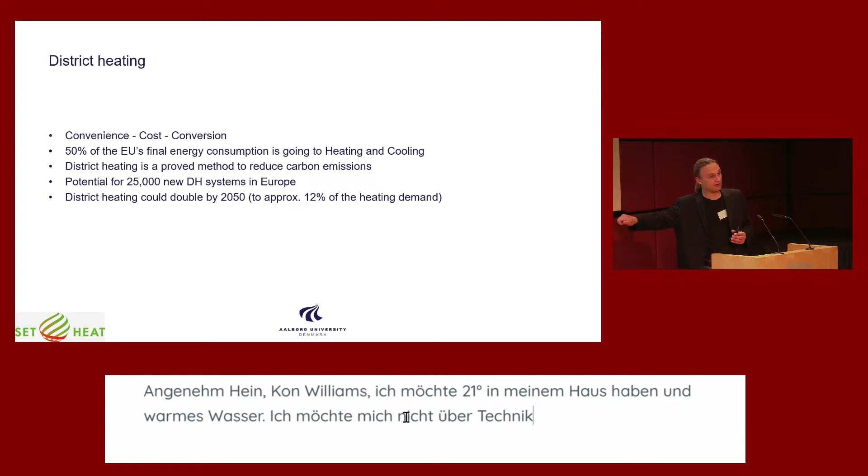Convenience, that means that I want to have 21 degrees in my house, and that's it. I want hot water when I turn on the water, that's it. I do not need to have a boiler I can fiddle with. I do not need to care about any technicalities. I need a Danfoss radiator valve thermostat that I can turn, and then my room gets warm. That's what I need. So convenience, that's a very big issue in Denmark, that you don't deal with anything. You don't have any costs. I've lived in my house for 20 years, and I've never paid for any maintenance of my district heating installation.

Cost, for 95% of Danish residents, the district heating cost they have is lower than the alternative of a natural gas boiler. So we have a very small proportion who would have been better off if they had a natural gas boiler. If we compare to electric heating or individual heat pumps, it's even smaller shares. It's something like 99.7% of district heating consumers. They are better off with district heating than if they had had an electric boiler in the system. The reason it is not 100% is simply that we have also expanded to some places where people have made miscalculations. Heat density too low, gas prices too high, or electricity prices too low, or whatever they have designed the systems according to.

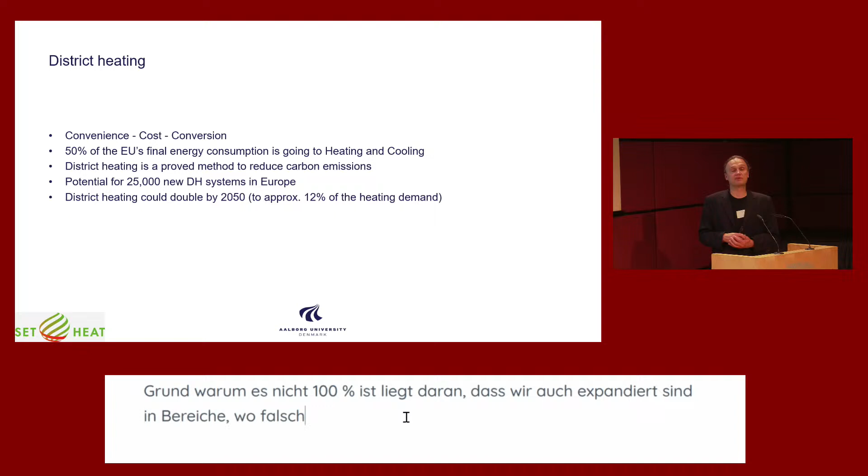But for the vast majority of Danes, district heating is the cheaper option, and everybody wants to get it if they have the opportunity of getting it, basically. Lastly, my last C, that's the conversion. When we are converting the energy system, we're transitioning to carbon-free technologies.

If you have a city of, let's say, 100,000 dwellings, well, if you have to address them individually because they each have their individual solutions, you will never transition that city. But if it's a district heating company who can basically make the change in-house, then it's a completely different situation. So basically, I'm living in Aalborg, and I don't care about how I transition my house because the district heating company does it for me. And it's the same throughout the country.

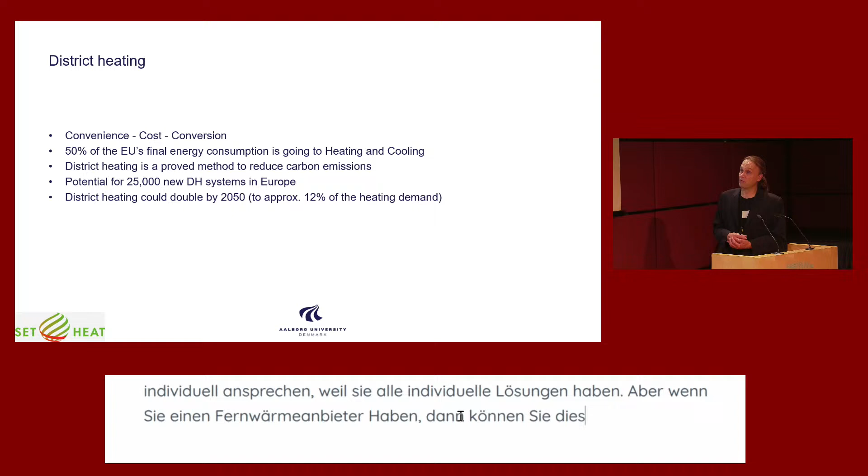A few numbers. We already heard that we could take all the waste heat that we have in Europe, surplus, excess. We have 3 different words, but if I use them, it will mean the same. We can take the excess heat that we have in Europe and basically heat all the houses in Europe. Another number is that 43% of the energy that goes into industry or into power plants is waste heat. So whenever you're putting 100 units of energy into some activity, then a lot of it goes into the nearest stream, the sea, into the air, or wherever you will blow off your heat to. So 43% could actually be used for something else.

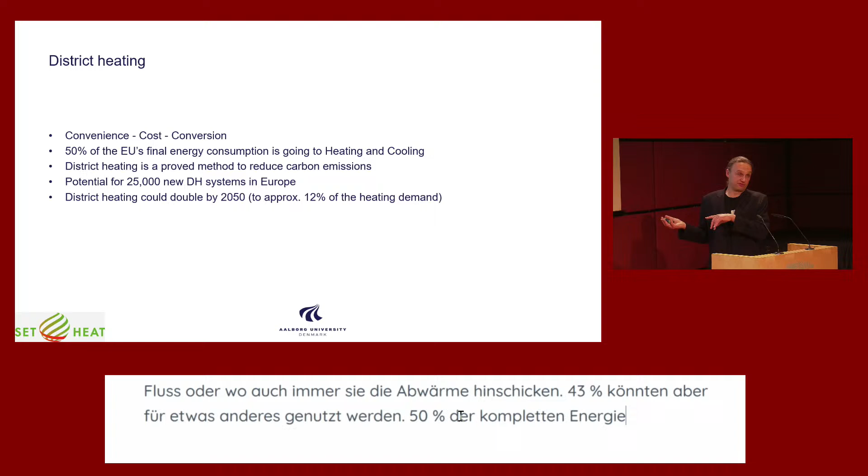Secondly, 50% of the overall EU energy consumption, that goes to heating and cooling. So we have a very large potential for doing something. That's the positive way of saying it. Of course, the negative way of saying it is that we have a big issue there. But fortunately, we also have some very nice solutions. So district heating, that is definitely a proven methodology for tackling this issue.

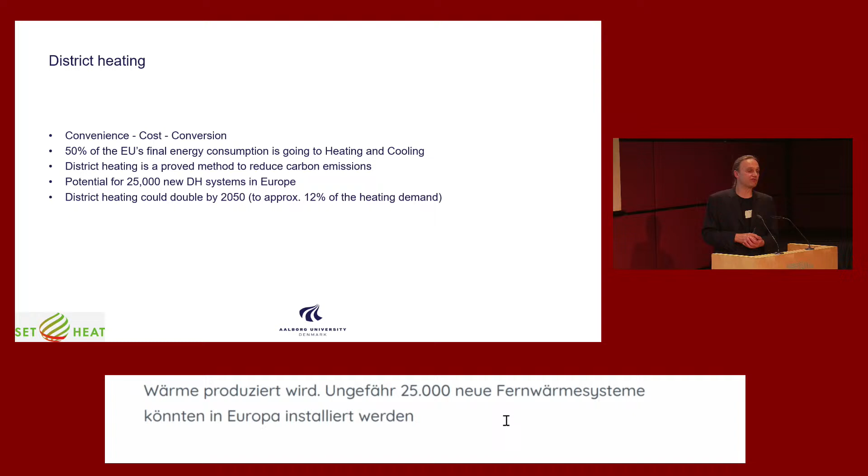We have made various studies on a European scale and tried to see where do we have a nice concentration of heating demands, and that is the prerequisite basically for district heating. But something like 25,000, give or take, new district heating systems could actually be installed throughout Europe, and we could double it. These numbers are a bit old, so maybe I think we have a bit more than 6% of district heating now, but we could roughly, with a certain economic sense, also double the district heating demand. And of course, if we go for the full exploitation of the waste heat demand, then we could go even higher than that.

So I have made 3 steps basically in my utilization of waste heat. The first one, that is basically what we call cogeneration of heat and power, where you actually take the heat from power production. And in Denmark, we don't actually consider this waste heat or surplus heat because it's so ingrained in our system that this is not waste. But go outside Denmark, then it is waste heat. Go to France, nuclear reactors. There's no exploitation of the waste heat from nuclear reactors, for instance. So cogeneration of heat and power.

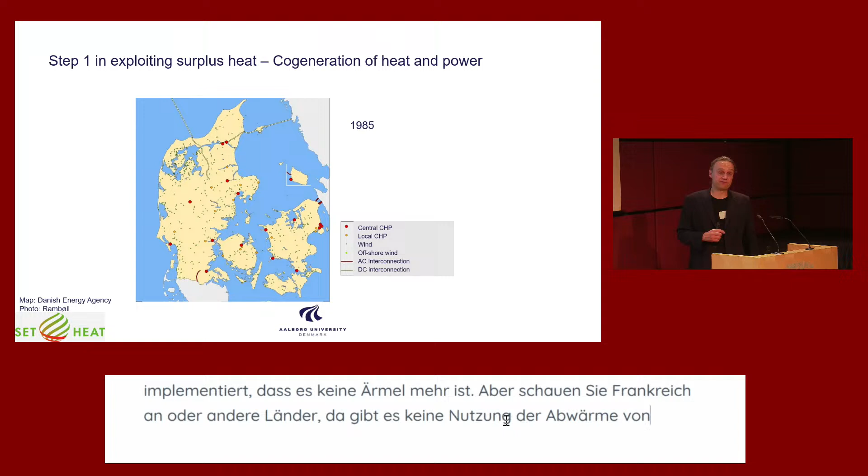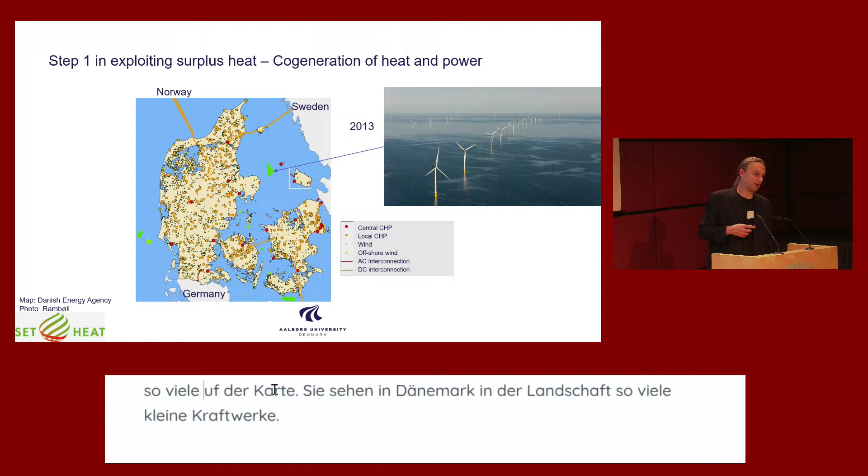In Denmark, 1985, we had a few big power stations where you actually utilized the heat. And then we started heat planning, and then we moved electricity production out into the countryside, out into the small towns and villages and cities of all sizes, and basically located electricity production where you have a heating demand. And that's why you suddenly have all these new orange dots throughout the Danish landscapes. And then when you're driving in Denmark, you will see all these power stations located in the landscape because they all have a thermal storage, so you can easily recognize them. So that's one thing. Now, of course, we're moving offshore, and that means that all our power stations are going toward heat pumps or waste heat or whatever we can put into the grid.

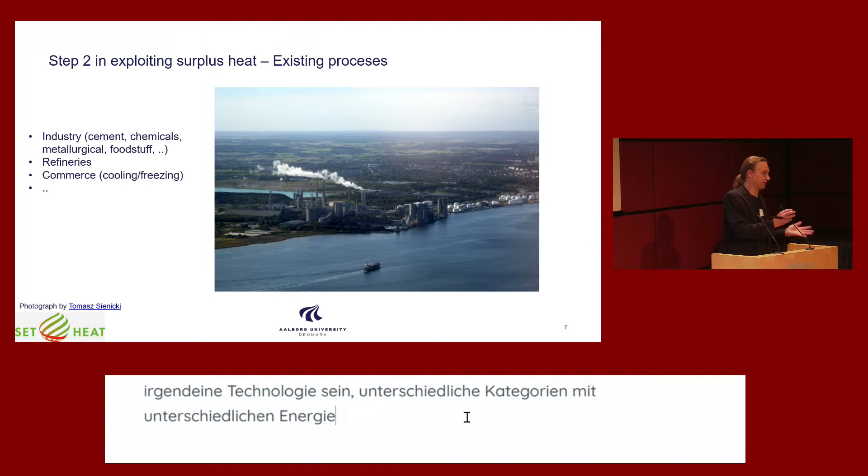Secondly, that is exploiting existing surplus that we have in the system. This is a cement factory, but it could also be chemicals. I know that's a sulfuric acid factory in Hamburg, which is supplying a lot of district heating. Metals, any technology basically. In different categories, you will have different shares of the energy which could actually be used. In food stuff, it's like 10% of the energy that goes into it you could actually extract. In metals, I think it's about 25% of the energy that you put into them that you can actually extract as waste heat.

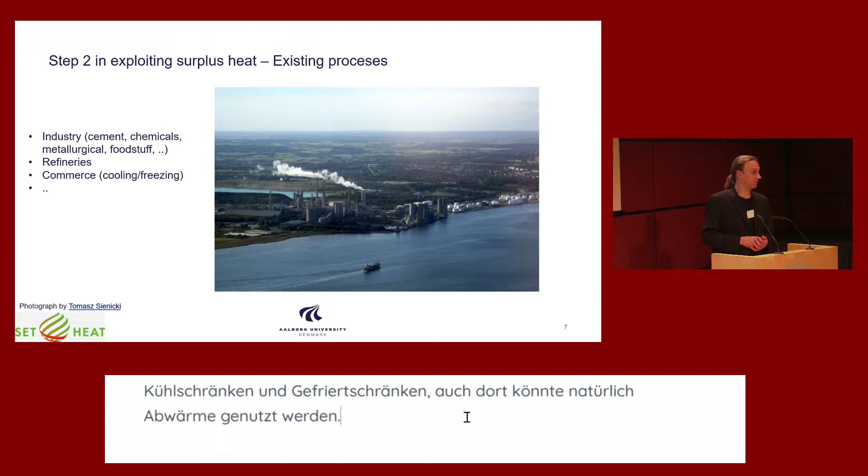Refineries, commerce. That's maybe one of the newer ones because that's a little bit more scattered. You don't have the very large ones, but I mean, when you have a small supermarket, just the cooling and freezing facilities they have, they can actually be picked up and put into a district heating grid and thereby supply heating to residents in the area. So it's just a matter of imagination that you simply have to look where do we have heating demands, or surplus heat, and basically whenever you have an energy demand, then you will typically also have a waste heat resource.

Step 3, and this is where we are moving now and where we're also moving in Denmark. First of all, we have a game changer in Power-to-X because that is really going to generate vast amounts of surplus heat. I think it will double the amount of waste heat that we basically have when we start looking into Power-to-X, because of the conversion efficiencies of Power-to-X facilities, but also something like data centers. In Denmark, we're expecting them to ten-double in about 10 years, going up to 40% of the electricity demand in about 2035, I believe.

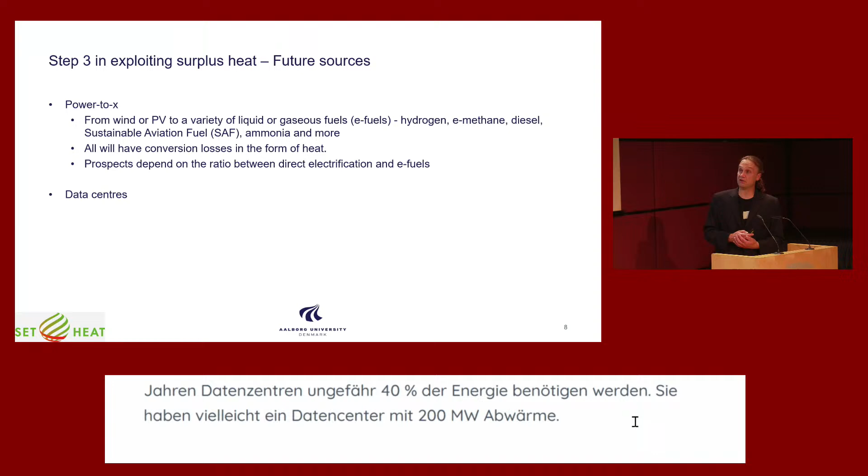And basically in a data center, you might have a data center using 200 megawatts of electricity, and that more or less translates into 200 megawatts, you can deduct a bit, of waste heat. So you have an enormous amount of waste heat from data centers. So that's also definitely going to be a game changer. So that was my 3 steps of utilization of waste heat.

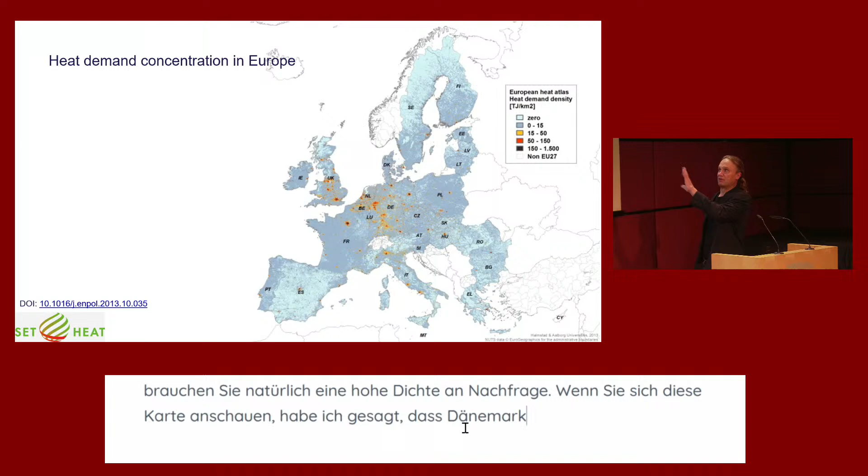Let's look at heat demand concentrations in Europe, because when you want to have district heating, then basically you need to have a high density of heating demand. And strangely enough, if you look at this map, I said that Denmark is the place in the world with the highest proportion of district heating. It's only Copenhagen that actually has any kind of coloring on this map, despite what I said. So not having colors does not mean you don't have a potential. And you could also say that places with color definitely have a potential. So we have a lot of potentials throughout Europe.

So whenever you have a color on this map, that means you have a very high heating density. So Paris has a very large heating demand, but of course there's no district heating in Paris. You don't typically utilize waste heat from nuclear, as I mentioned. That's one of the reasons why you don't see anything in France, for instance.

So for those of you who are not into thermodynamics, whenever you're producing electricity, you waste a heck of a lot of energy in the form of heat. The same in your car, basically.

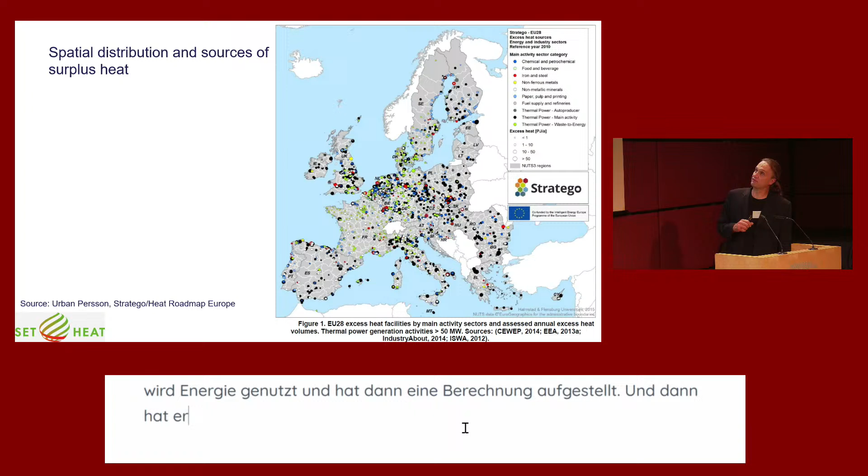So this is my colleague Urban Persson, who made this also in Heat Roadmap Europe. He went into the EU register of all CO2 emitters, and he pinpointed them on a map. He found out what they're using the energy for, and he made this calculation of basically if it's foodstuff, then it's like 10%. If it's metallurgical industry, then it's more like 25%. And then he found all the different point sources that we have of waste heat in Europe. So these are all the different sources that we have in Europe. Different colors are indicating different types.

And you'll see also in Germany, of course, we have plenty of large point sources of waste heat that we can use. And again, Denmark actually also shows a nice selection of sources, but it does not even capture what we have in Denmark. So if we expand that to other countries, it will not necessarily capture it, especially not if you are taking the electricity production and moving it to places without current electricity production, but where you have a heating demand. Then you can go beyond this map here also.

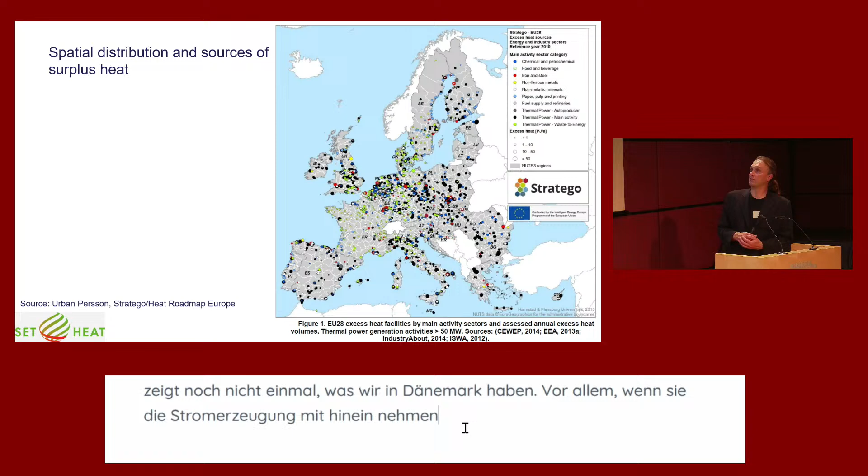We made some scenarios of how we can basically design a European energy system. And just one comment about this: 70% of the heating we found here, or Urban found, is from power generation, 25% is from industry, and 5% is from waste-to-energy plants.

But as was also mentioned before, when we are looking into this, there's a local aspect. So basically, where do you have it? And do you have it near a heating demand? So that's one, you have a spatial aspect. You also have a temporal aspect: does it occur at the right time or not? And thirdly, you will also have technical issues.

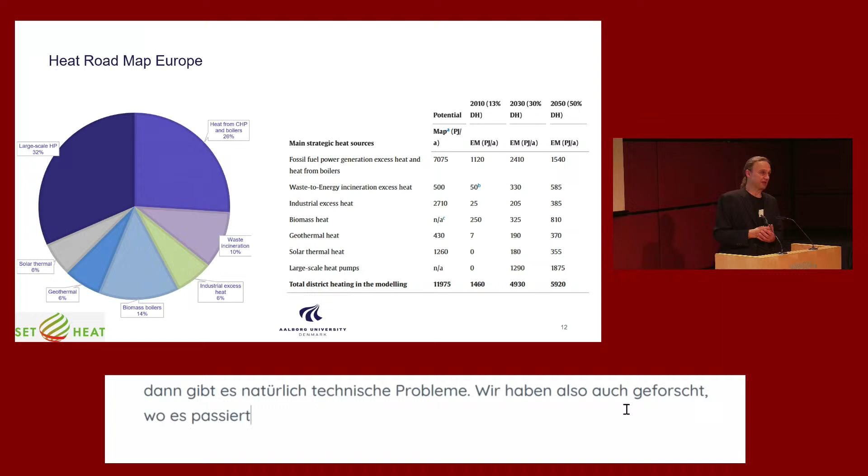So when we're making these analyses, we're also investigating where it happens, what the profile is over the year and over the day and so on. Does it actually fit into the energy system? So here, of course, waste incineration is typically placed in the vicinity of big cities and industry. Sometimes you actually put them far out in the countryside where you can't actually use the energy.

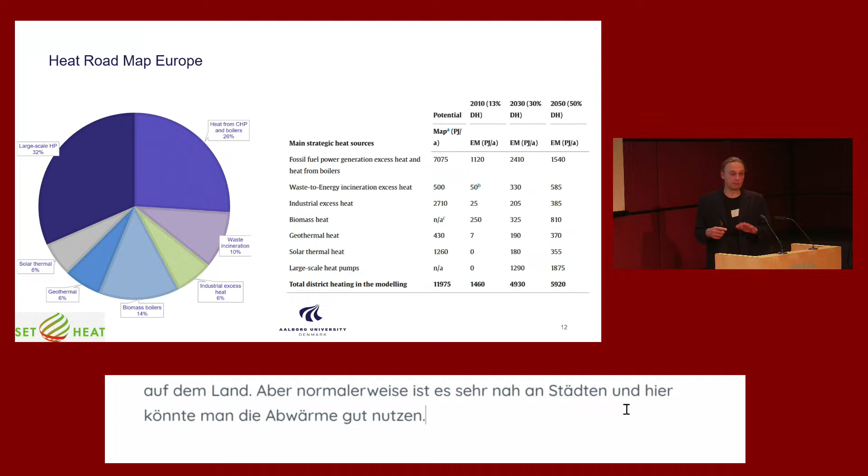Industrial excess heat you also have here. So even though this is 5 times higher than waste incineration in actual numbers, since waste incineration is more controllable, we can use that a little bit more.

Heat pumps, that is definitely something that we're also looking into in the future. And we will also combine them with waste resources, because whenever you have a waste resource, maybe it's at 20 degrees, maybe it's at 30 degrees, which is not sufficient for heating a house. But combined with a heat pump, it provides a very good opportunity for providing low-cost heating.

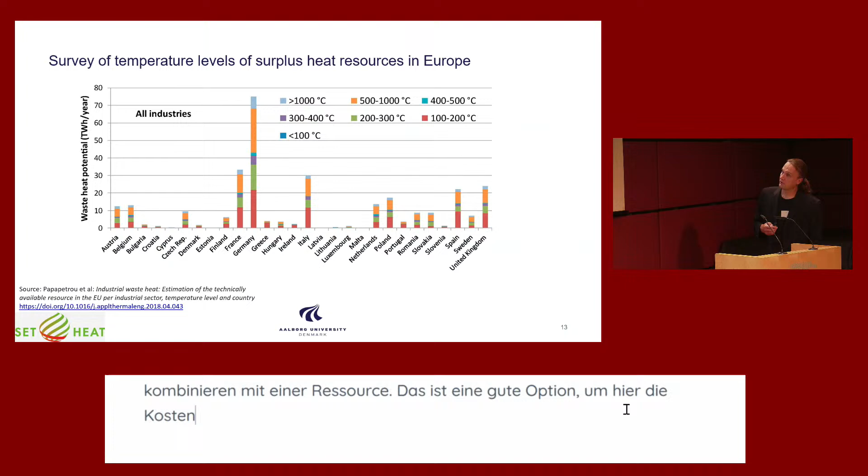I'm skipping this because I'm a bit short on time and it's not so interesting.

But about the temperature levels, because what we are also doing is moving towards lower temperature levels. The lower the temperature levels you have in the district heating system, the more opportunities you have. For instance, if you take the heat from cooling in supermarkets, that will come at modest temperatures, whereas if you have something combusting, then you'll have it at higher temperatures. So you can't use the lower temperatures directly.

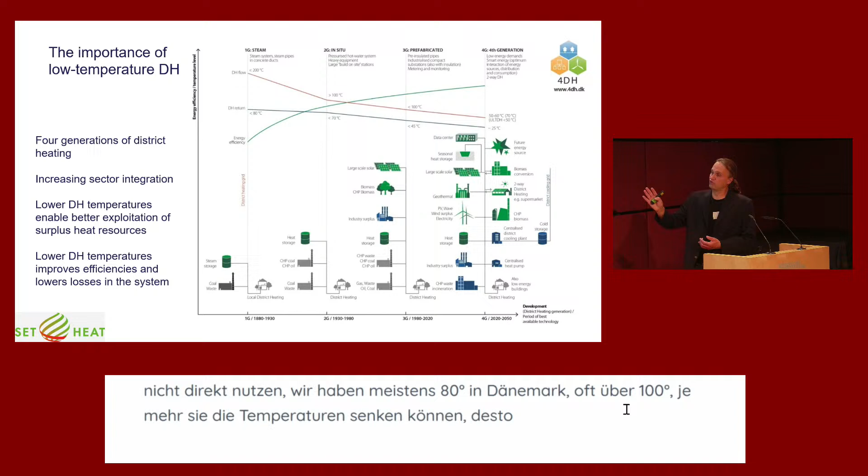Typically in Denmark you will have about 80 degrees, and I know that in many other places you'll have temperatures above 100 degrees. But the more you can push the temperatures down, the further you can actually use your energy or your waste heat.

And moving towards the more complex fourth generation district heating system, you're going down to temperatures of maybe 60 degrees, and that means you have more options for using energy directly and not through a heat pump. Heat pumps are nice if you have something at 20, 30 degrees, but if you have something at 60 degrees, then it's basically nicer if you can simply accustom the consumers to use lower temperatures.

This is just a scenario that we made for Aalborg, where we have the surplus heat. Of course, we have some good facilities in Aalborg for providing surplus heat. So this is about 50% of the entire heating demand in Aalborg that we can easily supply with surplus heat.

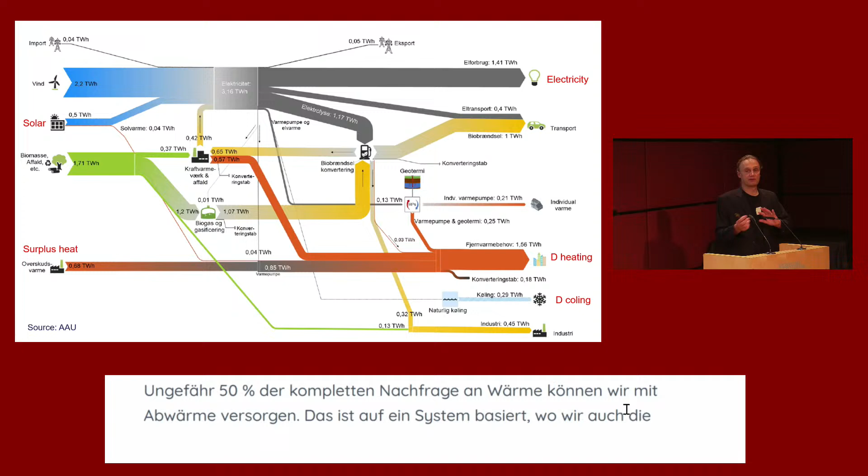And it should be mentioned that this is based on a system where we have also looked into the temporal characteristics of power production, PV, wind turbines, and everything, to basically create a system which is in balance. So it's not just a matter of having surplus heat and production at certain times. They have to be at the right time, and you have to provide the flexibility measures to also use them in the system.

Looking at how it's gone over the years, the top curve here shows the production from the big central power stations. So that is surplus heat, in the Danish context at least. That is still a very large one. Then we also have surplus heat from smaller CHP systems based on gas engines and gas turbines. But they have actually been decreasing over the last few years, because electricity prices are so low that there are no economic incentives for using them.

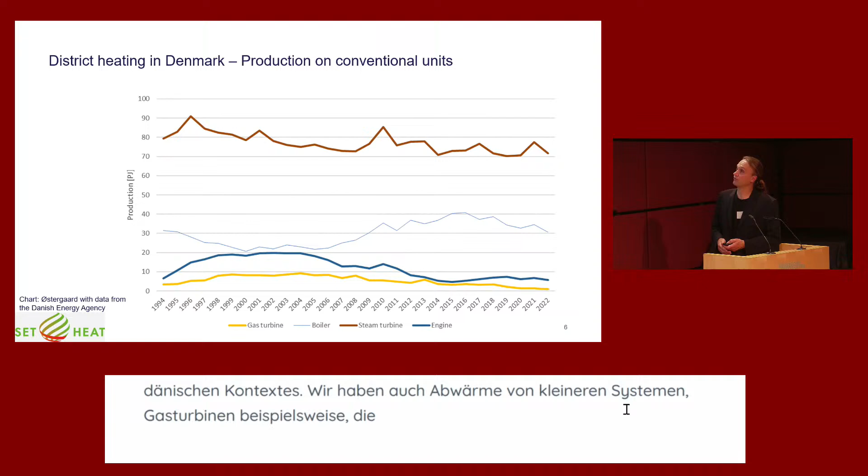What has happened instead is that things like electric boilers, solar heating and heat pumps are very much on the increase. And also waste heat. This is industrial waste heat, as opposed to the one I showed before, which was waste heat from power generation. Industrial waste heat has been constant over a number of years, but now it's increasing because we are trying to focus even more on where the options are for surplus heat.

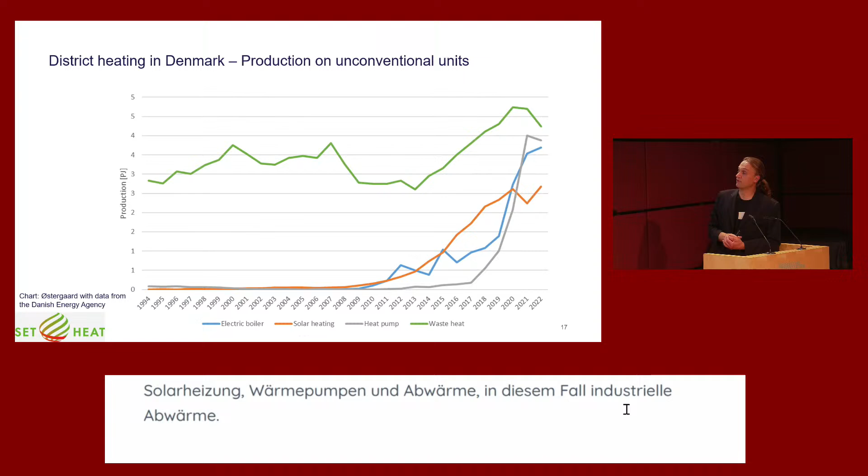And those were my words on the bigger picture of district heating and waste heat resources in district heating.

Thank you very much. We do have time for one question of clarification. If anyone has one question that is really just about any of the points that Paul made, not debate yet. If you don't have any questions, we can also just move on. But I'd have one question.

If you add up the graphs that we saw now, what is the percentage of unconventional heat versus the old system? It's still small. But if you compare waste heat, for instance, with the gas turbines and the gas engines from the smaller CHP, then it's actually bigger because they're basically being phased out by the logics of the electricity market and the other ones are coming in. So even gas turbines in big cities, in the Danish context, big cities like Viborg, they are being overtaken by waste heat resources because they are not economically attractive.

Great. We'll be happy to hear later on in the session what that looks like in practice. And now it's back to Kerstin Deller as part of our double feature, and you will give us an insight into what the German government has up its sleeve to make this transition happen in Germany as well. Thank you. Yes, maybe we can switch to the other slides. No? Okay. Yeah, perfect.

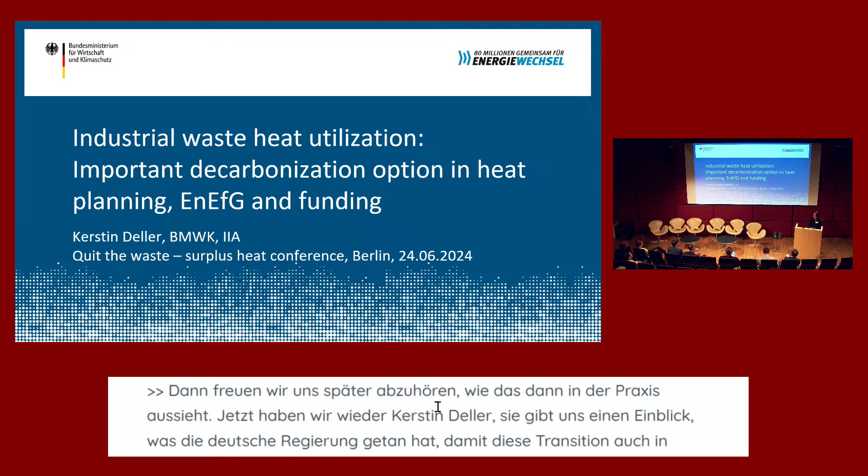Actually, as you have presented, we also see industrial waste heat utilization as an important decarbonization option in heat planning, in our Energy Efficiency Act and in funding. And I will focus on what has happened since last year when we were talking about these issues. I will present what we did in regulatory law concerning the Heat Planning Act and also the Energy Efficiency Act to promote the use of surplus heat, and also how our funding schemes are set up to promote this.

When you showed your slides on the whole of Europe, we saw that Germany is complicated. It's not like there's one area where there's a lot of district heating. You can look to the east, there are many district heating systems. You have other parts in big cities in the west, but you have areas where there's primarily decentralized heating. So a general approach in Germany is difficult, which is why we are making heat planning mandatory for the states, the Länder, but primarily for the municipalities.

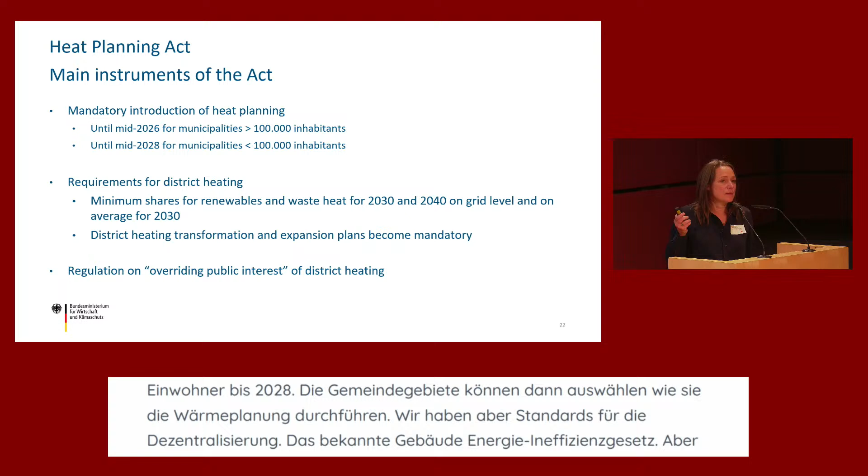We do have standards for decentralized heating, how much renewable energy has to be used, the famous Gebäudeenergiegesetz. But in our Heat Planning Act, we also have requirements for district heating, minimum shares for renewables and waste heat for 2030 and 2040 on a grid level and also on average for the whole country. These district heating transformation and expansion plans also become mandatory from then on.

How are the municipalities supposed to do heat planning? First of all, as you did for the whole of Europe, an analysis of the current status of municipal heat supply. Then a potential analysis of what renewable energy and waste heat in the planning area is there. And then the third step is a target scenario, including zoning of heat supply areas, which means it's either decentralized or district heating, and also showing a path towards how the targets are supposed to be reached.

From this, municipalities are supposed to make action plans, meaning a roadmap with specific actions, how to achieve the goals of minimum renewable energy and waste heat. More specifically, for the federal average, all district heating systems are supposed to reach at least 50% either of renewable energy or waste heat by 2030. And for each specific district heating system, it's supposed to be 30% by 2030 and 80% by 2040, every time either from renewable energies or waste heat. That is for existing district heating systems, so for transformation.

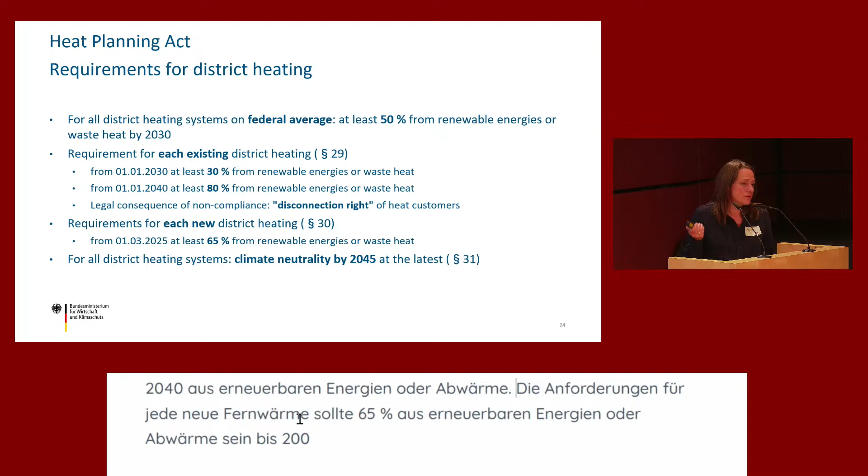Waste heat, as I already said, is equated with heat from renewable energies, which is a strong incentive to district heating operators to get in touch with potential waste heat suppliers. I'm not talking about cogeneration, but industrial surplus heat, and to integrate waste heat in district heating. For the potential analysis, how much waste heat or surplus heat is there, we have some regulations in the Energy Efficiency Act, which help to identify and leverage the potentials for surplus heat, especially for district heating. That's the second point I wanted to talk about. What is there on surplus heat in the Energy Efficiency Act?

Actually, this is the first legal framework to improve energy efficiency in Germany. It's in place since November 23. And it does have binding targets for both primary and final energy reduction in alignment with the European Energy Efficiency Directive.

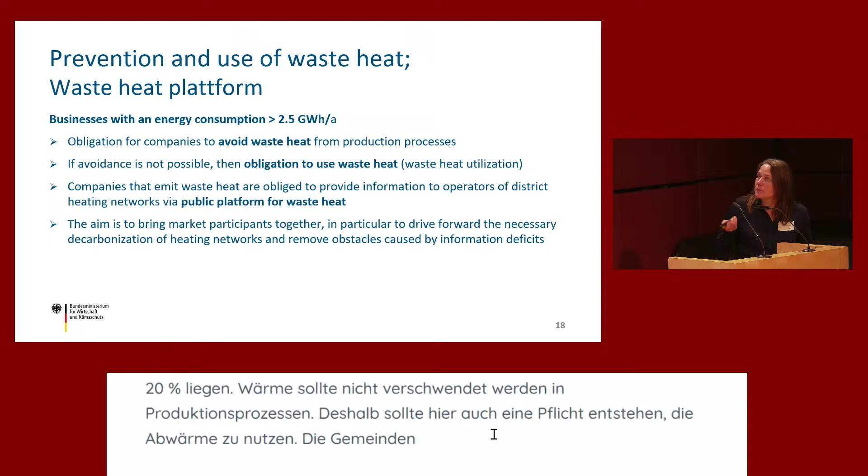So that the municipalities do know what surplus heat will be there, the companies are obliged to provide information to operators of district heating networks via public platforms for waste heat. And the aim is to bring market participants together, in particular to drive forward the necessary decarbonization of heat networks and remove obstacles caused by information deficits.

We also will have Frau Fröhlich presenting this afternoon something which is called AVANET, which additionally to the platform I presented now, has the objective to bring together on the one side companies, and on the other side district heating operators to bring projects forward, and also to learn from projects which have already been put into place.

As for the funding side, we do have on the one side the possibility to support projects from industry which want to, on the one side, reduce energy use, and on the other side, measures to extract waste heat and to connect this to district heating systems. The funding amount is maximum 20 million euros per project.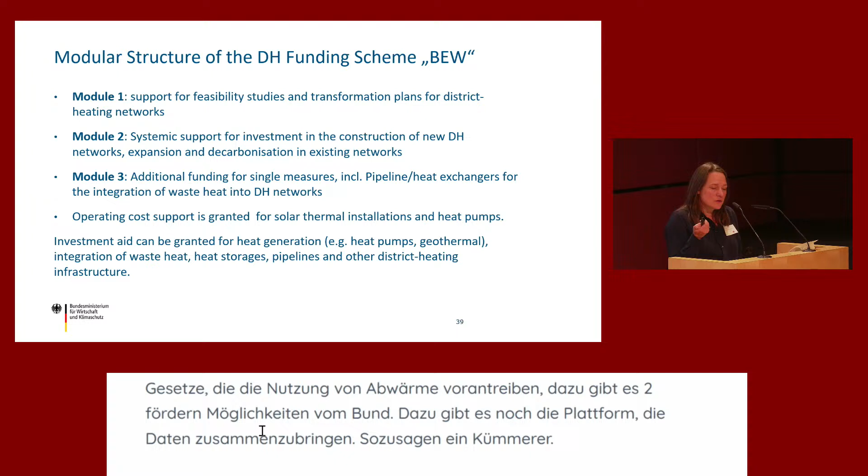So what happened since last year, to sum up, is we do have two legal acts in place which are supposed to incentivize the use of waste heat in district heating networks. We also have two funding schemes in place. And we do have a platform to bring data together, and also we fund a kind of Kümmerer, I don't know what that is in English, a project which really tries to stimulate communication and the dialogue between the relevant actors. Thank you.

Thank you, Kerstin Della, also for making up time. Excellent. I see already there's one question for clarification from up here. Please. I think you can just speak up like that, yeah.

Nico Vogler, 50 Hertz. I have one question regarding the platform for excess heat. On one of the slides it said that the target of the information are the district heat operators. Are those the sole targets? Is the information on the platform exclusive for the district heat operators, or is it also available for other actors? It's supposed to be available for everyone, also for example, for municipalities or others.

Thank you. Great. I'm afraid we'll have to save it for the podium. Thank you, Kerstin Della. And now we move on to Torkel Ingard from the Danish Energy Agency, heat specialist there.

And we are going to hear a little bit more about how you help the potential that Paul outlined to become reality. Yes. Am I going the right way?

Yes, there you go. My name is Torkel Ingard, and as I was introduced, I'm part of the Danish Energy Agency. My director, Tilde Helsten, should have been here today, but she got sick, so you have to make do with me. But I'm not completely irrelevant. I'm the project lead on the Danish-German cooperation on district heating. And I've also worked extensively on developing the Danish framework for waste heat usage in district heating.

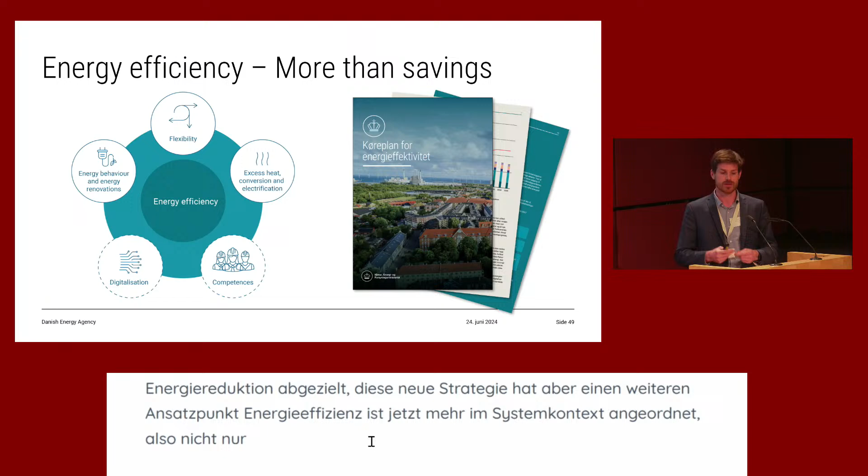This roadmap and strategy is supposed to be both a roadmap for how we implement the new energy efficiency and building directives, and a new strategy for how we work with energy efficiency. While historically energy efficiency has been very much focused on direct energy reductions, this new strategy is supposed to take a broader, more holistic focus, seeing energy efficiency in the system context. So instead of only looking at direct reductions of energy consumption, we should also consider what type of energy is being used, when it is best to use this energy, where it is best to use it, and of course still maintain a focus that we shouldn't use energy if we can avoid it.

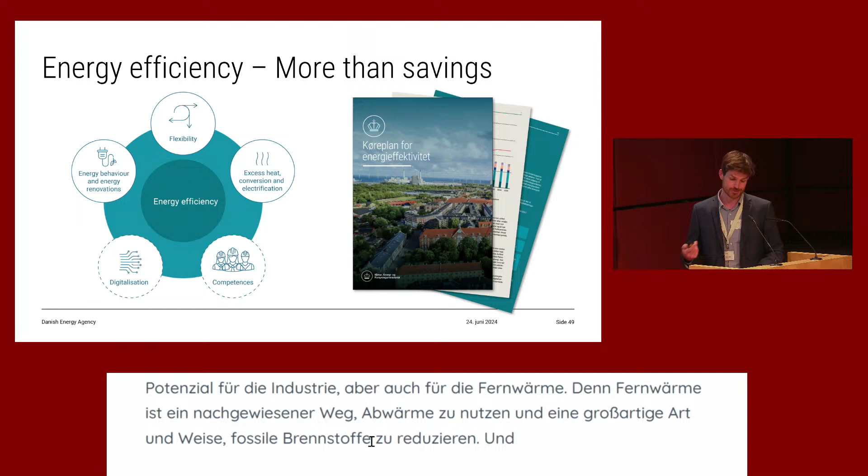And waste heat plays an important part of this for both energy efficiency, because it's an energy reduction potential in the industry especially, but also for district heating, because district heating or waste heat utilization is a proven way of doing sector integration. It's a great way to replace fossil-based fuels in the district heating production, and it can also just provide a lot of benefits to the way you operate your district heating system. So it's something we discuss a lot in Denmark, and it's something we'd also like to discuss with you guys here in Germany.

In 2022, when we did the last inventory of our waste heat utilization, we had around 64 waste heat producers delivering to 39 networks in Denmark, 39 out of 400 networks. It's mostly a few large producers producing the vast majority of the heating production. So in Denmark, the 10 largest producers of waste heat deliver around 80% of the total amount of waste heat. And we do mainly see that it's direct waste heat.

83% of the waste heat utilized is directly into the system without being lifted with a heat pump. And the last 17% is using a heat pump to feed into the system. Usually it's where the waste heat is part of the production portfolio in the system, but we also have some areas where it's almost entirely waste heat production. It can be up to 80 or 90% waste heat, but in those cases they always maintain their backup capacity, as they are reliant on this external producer.

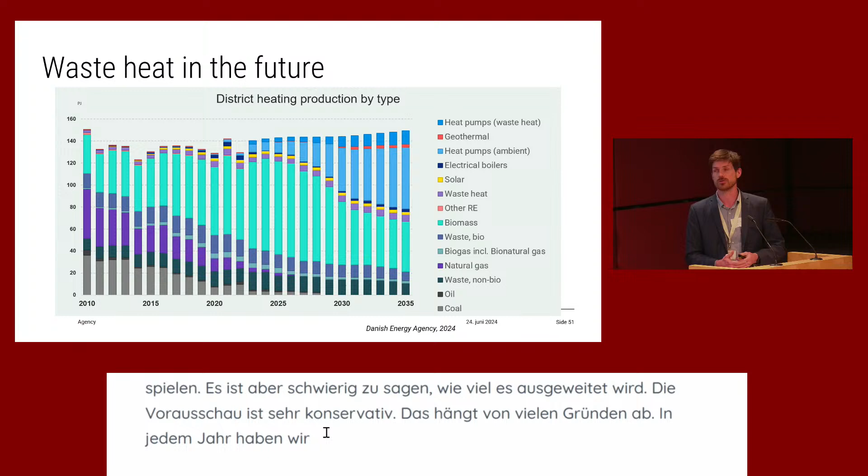There we are. In the future, waste heat is going to play a bigger role in the Danish district heating production. But it's very hard to say how much it's going to expand. The Danish forecast on the topic is relatively conservative, and that's due to a lot of reasons. Every year we do a big climate projection where we do a frozen policy projection into the future, in part to see if we reach our climate goals and if we should make any adjustments.

And as part of this, we of course also forecast developments in waste heat. And while we don't have a huge expansion of waste heat in the future, we do see some trends. First of all, the traditional industrial direct waste heat from large industrial areas, we don't expect it to increase dramatically. That's not to say that there's no potential.

It's just that we don't have any tendencies pointing toward new projects in the near future. But we do see a trend for an increase in the utilization for large electricity consumers, such as PtX and data centers, as Paul mentioned. And that is especially what we see here in the very top blue part, that waste heat from heat pumps from these sources is expected to increase. But how much is going to be very difficult. And then there are also some aspects that are not taken into account in these projections.

We also see the new Energy Efficiency Directive, which requires utilization of waste heat from data centers and also from other industrial energy consumers. We can also expect that these new changes will, of course, also impact the development. But how much relies on a lot of factors and also the transposition into Danish law.

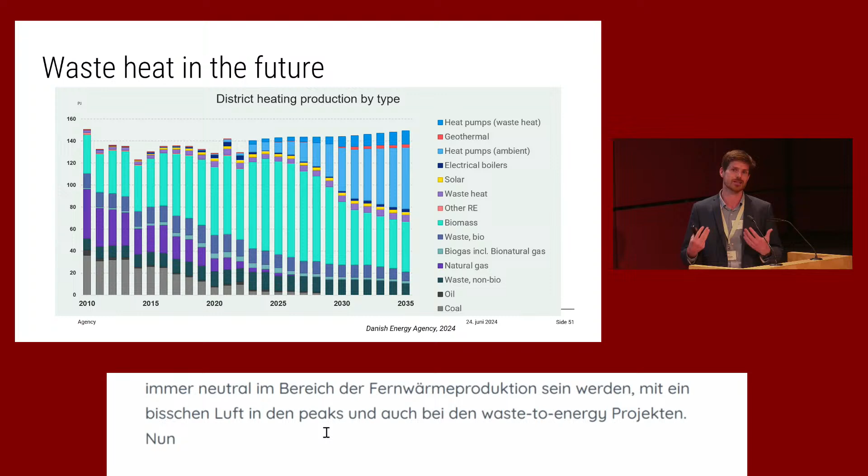But while it doesn't change the reaching of our goals, the waste heat still provides a benefit, because it can help increase the energy efficiency of the energy system in its entirety, but also because it can help displace some of the other district heating fuels. While biomass is better than coal, for example, it might still be a good idea to try to displace some of the biomass consumption in the district heating system. And there, waste heat will also play a role. So it is part of a lot of our future work. It's been a very busy policy area for the last 10 years, and it looks to be going that way in the future as well.

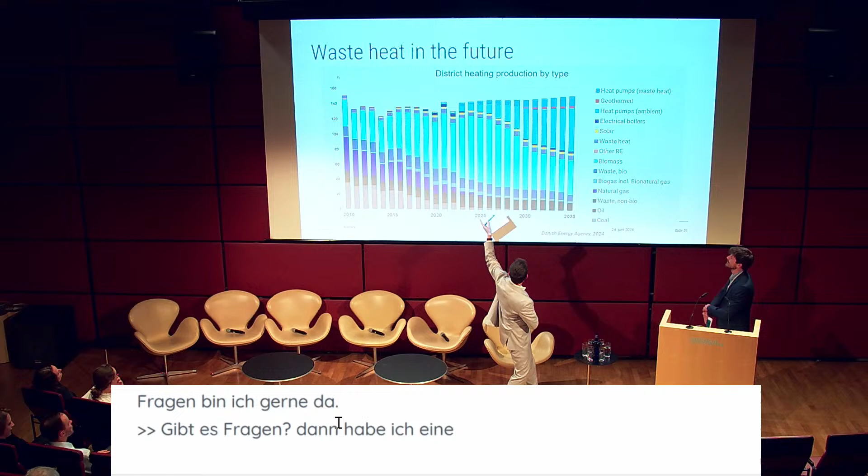Any clarification questions for Torkel? Then maybe I would just have one regarding this graph, because we see the amount of district heating produced going up. You mentioned the Energy Efficiency Directive and so on. Is this a function of the grid expanding and you just reaching more and more customers in an already well-developed heat grid environment, or is the consumption just not going down in this model?

It's a combination of factors. I think a little bit is the expansion, but also, even though we are increasing energy efficiency in a lot of parameters, a lot of it is difficult to bring down, and people are building bigger homes and getting used to more comfort. But that's probably something for the building energy efficiency experts we also have here today. A lot to discuss on that front.

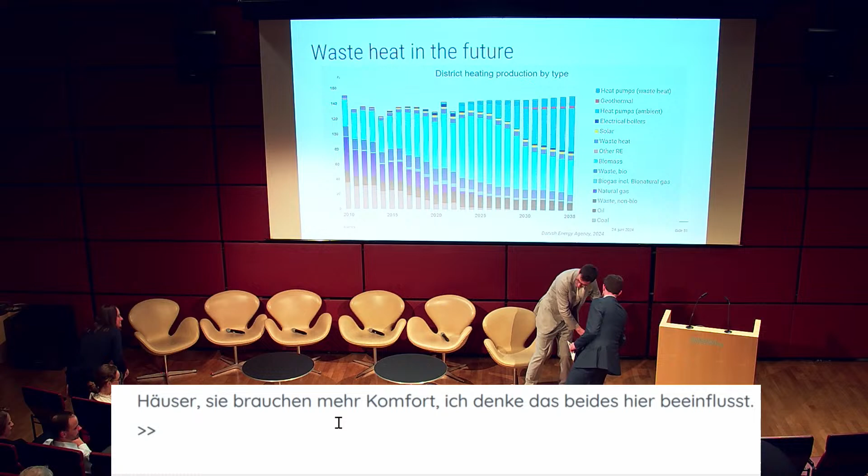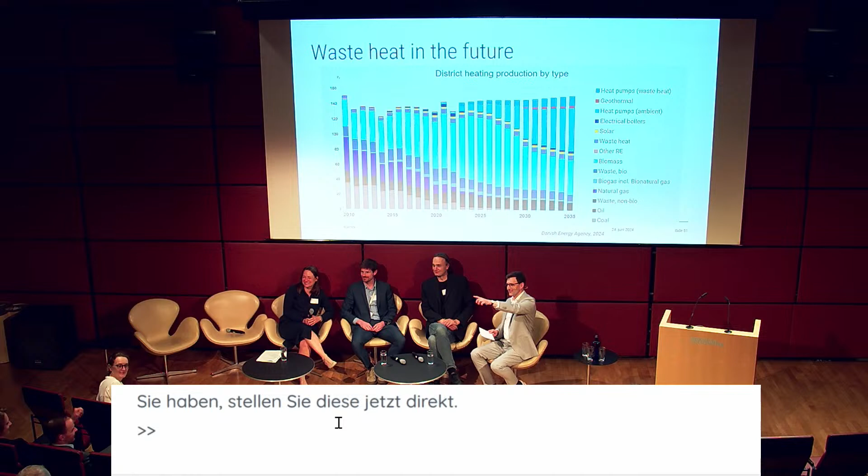Why don't you three come together? Grab yourself a water if you like, or let me just hand you one here. I'll just ask one question or so to each of them, and then you guys can jump in. Kerstin Della has to leave after this session, so if you want to ask her any questions, don't wait for the coffee break, do it now. Sorry about that. My colleagues are here. Okay, your colleagues are here. Can they identify themselves for later on? Where are they? Here. Okay. Excellent. Paul, let me start with you.

You showed us the massive amounts of waste heat that are there and that could be used. And you said even in your hometown, it could cover up to 50%. What are the crucial points where you'd say, okay, we need to work on this and this and this in order for that to actually happen?

Yes, this is turned on.

One of the crucial points is how you actually share the cost of doing this. Danish district heating is a non-profit organization, meaning if you make a profit, then you have to repay it to the customers the next year. So you're not reaping any benefits in the company, basically.

Secondly, they are not allowed to pay the industrial consumers or providers of district heating so much that they can actually make a profit of it. So they have to do it out of a sense of social well-being, or sense of communal responsibility. That's the word. So you have to convince them to do it, and that can be an issue because they're not allowed to make a benefit. But many industries will do it nonetheless.

But they are, of course, able to cover the investment cost that they have, with a small margin, but not very much. I think the Energy Agency has actually introduced a maximum price for how much they're allowed to pay. I was visiting a district heating company a few weeks ago with my students, and they mentioned a local company that they have been communicating with for 10 years about whether they could actually get district heating from them.

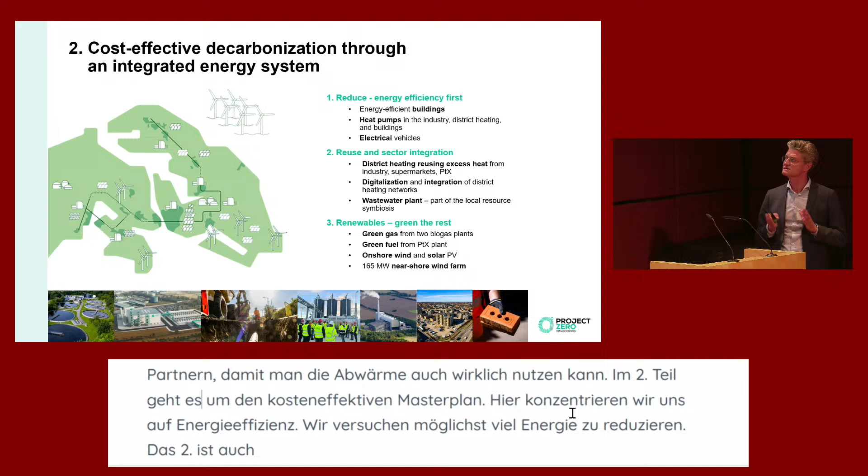The second part is about making a cost-effective master plan, and we are very focused on energy efficiency first, as I mentioned, reduce as much as possible so that you don't need to produce more renewables than absolutely necessary. The second one is to reuse the energy, and that is to a very large extent all about utilization of excess heat from industry, supermarkets, PtX, and also data centers in the area. And in order to realize this, we have to connect the networks.

When it comes to renewables, we have green gas from 2 biogas plants. Green fuel is being planned with Power-to-X, where there is a lot of excess heat, of course, and then PV and wind. Organizing local action is all about, you could say, Project Zero. The Project Zero team is the project management office of this organization. So we manage the whole project and have around 75 people organized in what we call hotspots.

I mentioned these sectors that we have in our project, and we then have a hotspot in each of these. Here we have put district heating as an example, where we work closely together in order to reach climate neutrality and also utilize the excess heat. So the project management office organizes, facilitates, and drives the motivation with all the stakeholders in this system. Then we have, of course, also the municipality as an important part in the system.

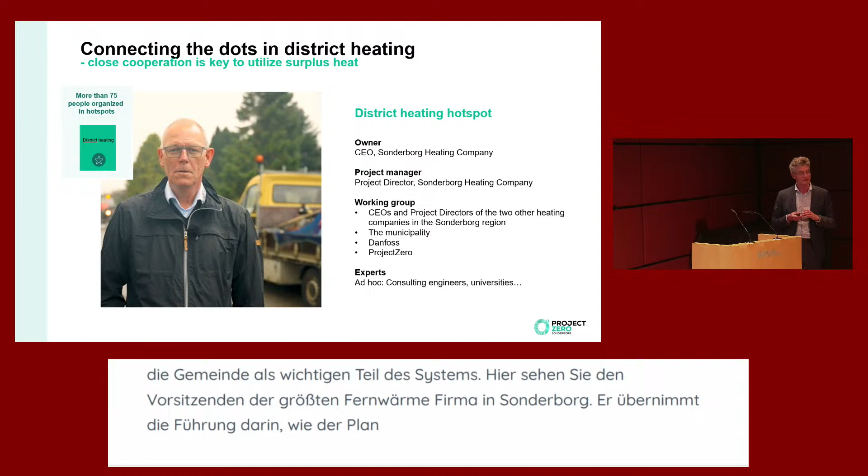In our plan, about 40,000 tons of CO2 was still in the district heating system, and that should be down to zero. It should be neutral in 2029, and on top of that, we need to utilize as much excess heat as possible in the system, and we actually have a target of reaching 40% of utilization.

Then the other district heating companies, the two others, are part of this group, together with the municipality. Danfoss is involved with their expertise, and then a manager from Project Zero is also involved. And when you sit together in these hotspots, then you can actually plan.

And we also heard from the other presenters that this is really about local planning, because you need to utilize the heat, the excess heat, locally. And if you don't sit together in these groups, then you will not be able to do it. So this is really about partnerships locally.

As I mentioned, we aim at being able to cover up to 40% of the heat demand in our district heating system with excess heat from supermarkets, data centers, industries, and PtX. And of course, district heating is essential in order to be able to do this, together with all the other, you could say, benefits you have with district heating.

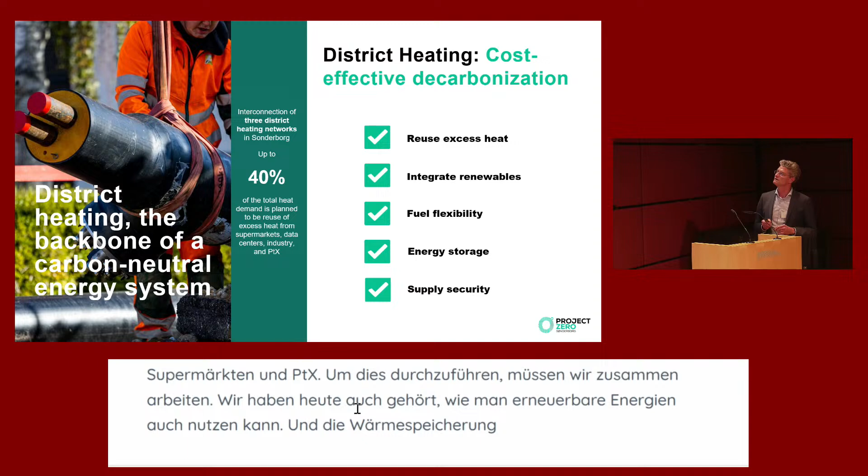We also heard earlier today how you can integrate and use renewables, and how you can use the district heating system as an energy storage. And supply security is also very important. You have many different sources of energy, and that means that you have supply security. Also, price-wise, it is very important.

You know the untapped source here, that we can actually cover all of Europe with waste heat. But the question is then how to do that, and whether you can utilize it all. And I would like to go a little bit deeper into that, because that is not always possible.

Then on top of that, you can actually sell the heat to the local district heating companies and also supply local homes and industries nearby. It's a small and simple solution, and it can be replicated all over the world, I would say. And as far as I've heard, there are around 30,000 supermarkets in Germany similar to this one, so there is quite a potential.

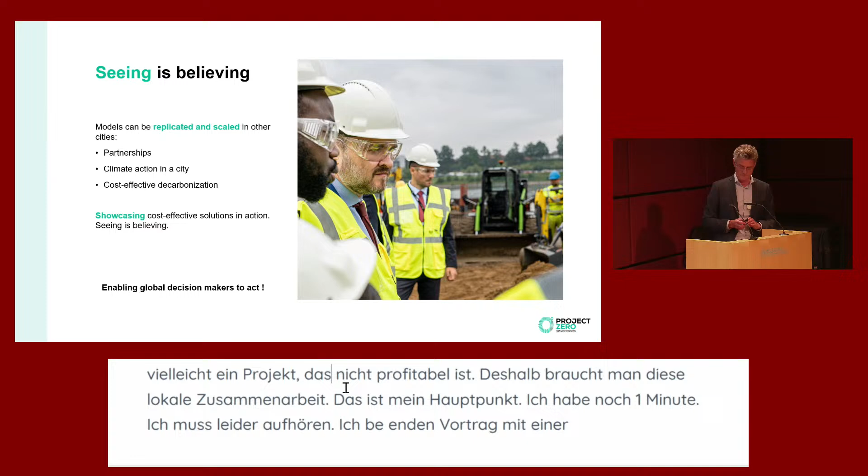Thank you, Ellen. We'll have one question from the audience, because I think this was a super interesting case study. Rüdiger. I love that case. Actually, I've been asked to provide this because the people on the internet cannot hear you. If you bring it up here. This is Rüdiger.

I'm representing the Energy Service Hub in Germany. So one question: when you look at connecting the utility and the industry together, and you mentioned payback times, had you anything designed for the case that the company is not existing anymore after 2, 3, 4 years? Or is that something which went quite well because you have a mix of different energies, like we heard before from the Danish Energy Agency, or from our colleague from Aalborg?

Sorry? We don't have examples of that yet, but we are very keen on, now I'm talking on behalf of the district heating company, because of course you have the direct contract between the district heating company and the industrial company.

But you need to have clauses within that contract that make sure that you actually get your heat, and that on a 10-year basis. And of course there is always a risk, and you need to take care of that risk. And therefore I also take this mobile solution into consideration. And then you need to find out how to share that specific risk. So that's my point.

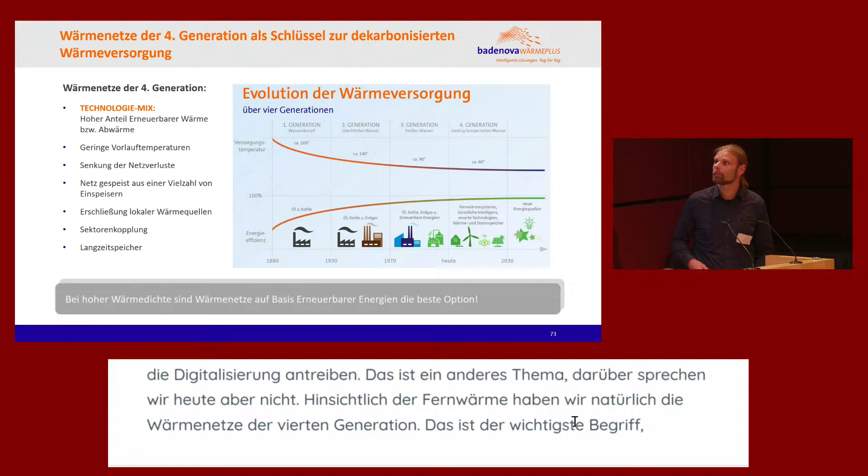For district heating, of course, we always have district heating of the fourth generation as one of our most important ideas, which of course is well known, but to have the same understanding for everybody, just to make sure what is the fourth generation. Of course, a high percentage of renewable or carbon neutral energy. And in order to be able to utilize this energy, you need to have a low supply temperature in the network, because in general, renewable energy is only available at low temperatures, and so you try to reduce the effort to make it available or to utilize it.

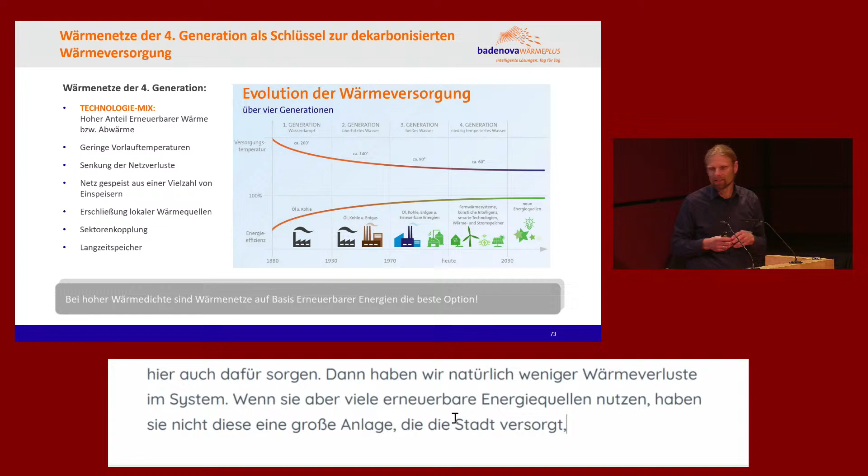This, of course, leads to less heat losses in the system, but the main consequence is, if you use a lot of renewable energies, you're not having this one big power plant supplying the whole city anymore, simply because renewable energy is not everywhere available. You have groundwater on that side of the city, you might have biomass on the other side, you might have waste heat in the south. So in the end, you need a district heating network which has a lot of different energy suppliers at different places. And this can only work if you have a smart network.

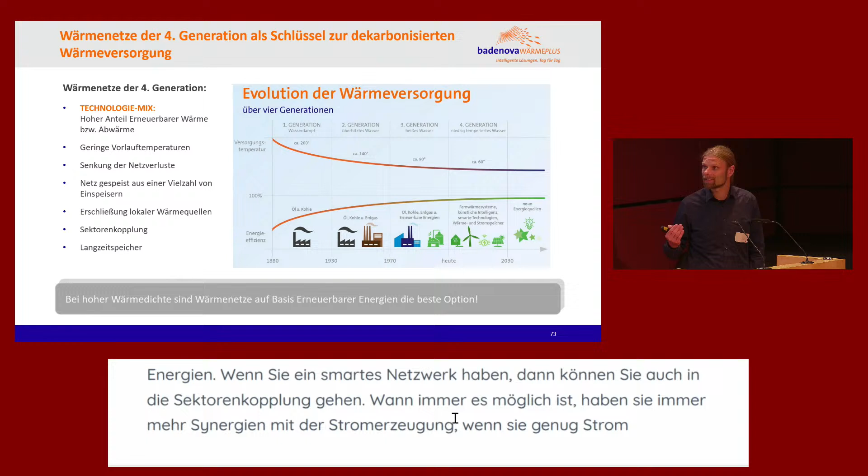So you need to have a lot of digitalization in order always to follow demand by the supply with the lowest cost and the highest renewable energy amount in it. And if you have a smart network, you can also go to, I actually didn't find the English word, Sektorenkopplung. So basically what we already heard today, that you, whenever possible, get more synergies with the electricity sector. If there is enough renewable electricity, you use it to produce renewable heat instead of wasting it, for example, with power to heat. Or on the other side, if you have your combustion engines, cogeneration units, you can stabilize the electricity market in that sense.

Anyhow, district heating systems only make sense where you have a high heat density, where you can actually justify all the effort, all the money it takes to dig in all these big pipes and so on. So it's always something for a city type and not a village.

That's why we take a look at Freiburg, and this main map is something which came out of the municipal heat planning of Freiburg, and even if the Danish people might start laughing about it, Freiburg started in 2019 and was kind of the first mover in Germany. But it was very important, and it shows how we try to make up all the time we lost in the last decades not doing it, but it's still a huge, huge challenge to bring it back. Because we, of course, have the goal to make Freiburg a district heating city.

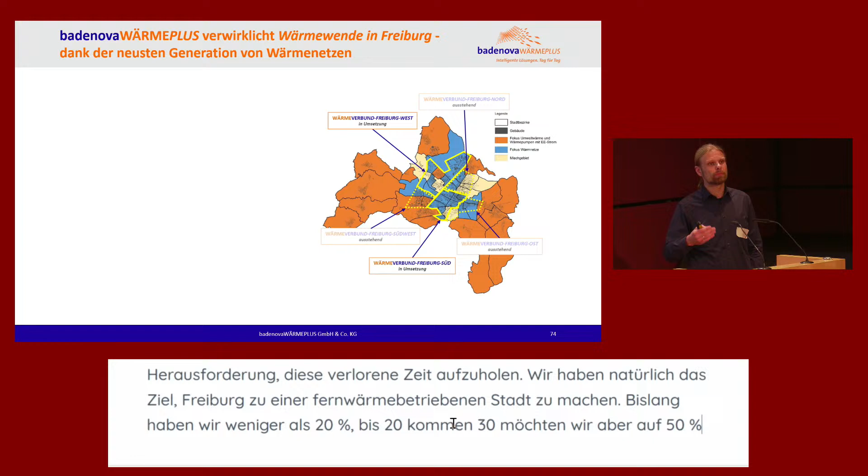At this point, we only have less than 20% of the city covered, but by 2030, we want to have 50% covered. And then, secondly, these 50% need to be 100% carbon neutral. And to give you a little example of what that means, Freiburg is like 7 times smaller than the city of Hamburg.

The city of Hamburg, as we understand, the colleagues are planning with 8 kilometers of building new heating pipes a year. We are planning 10 to 12 a year, simply because we don't have that heating network in the city yet. And so, of course, we can't do everything at once.

Just another map to give you a little example why we are heading for the Schwarzwaldmilch. We're having this district heating of the 4th generation. You see it, we have several kinds of heating sources with ambient heat pumps, biomass, we have groundwater, we have, of course, natural gas,

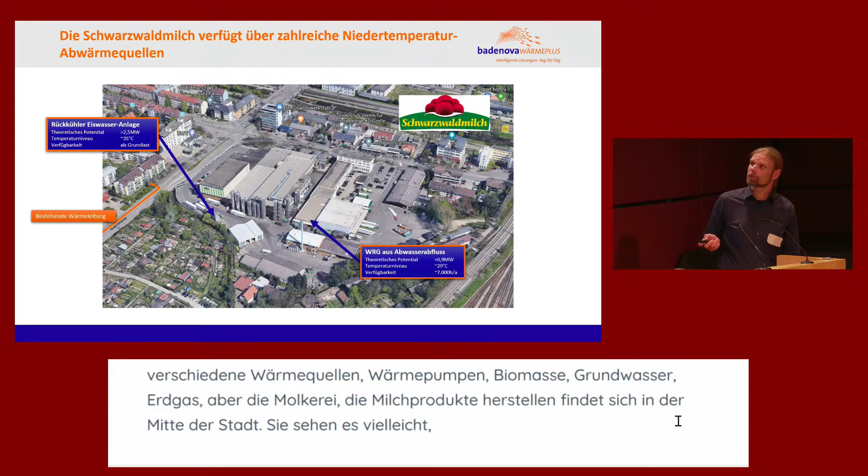peak suppliers in different places, but the dairy, Schwarzwaldmilch, producing dairy products, milk and so on, is located basically in the middle of the town, and you might already see it. The green dots are the existing network, so it's close by, and so we were able to really utilize the low temperature heat at this dairy. Simply what is available at this spot, and this is something I think is important, that low temperature waste heat is also very useful

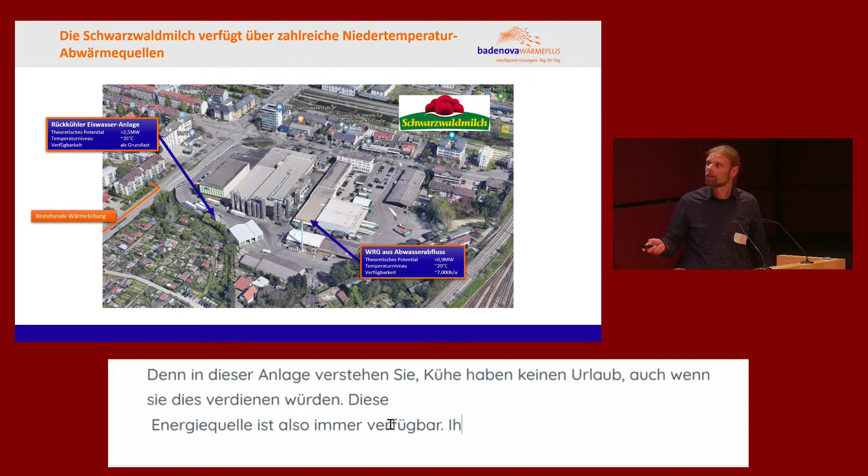and very good for such a system, because at this plant, you can understand, cows won't go for vacation, although they might deserve it, but the plant of course runs through the complete year. So this energy source is available all the time. And what is the energy source? A dairy's main work is to cool down the products, so take the heat out and usually throw it into the air, and to clean their equipment. And then you have a lot of wastewater, which both are in a temperature zone of, let's say, 30 to 35 degrees, which can be utilized.

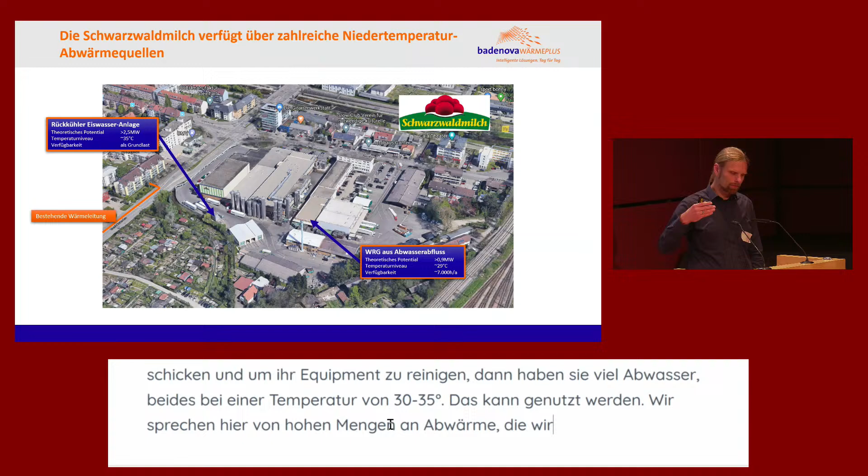These are huge amounts of waste heat, and we can now collect all this energy in one bigger power plant, let's say energy plant, and use large heat pumps in order to utilize it in the district heating network at that point.

At this point, I realized I didn't show any picture of it, although it's already done and already working. Sorry for that. If you like, I might send these around later.

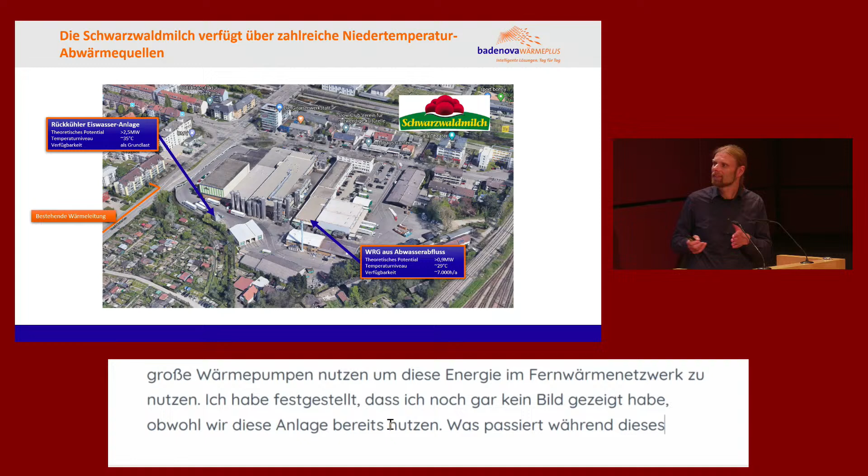But what happens during the process of this partnership with the dairy is that during engineering you get lots of new ideas, and so the energy plant is quite complicated. I tried to do a very easy and simple schematic of it, which is this. So don't worry, I already had the 2 minutes and I didn't plan to go into details with you on this. Happy to do that afterwards on another occasion, but the main outcomes of that:

In total, if we look back 10 years ago, waste heat was really neglected because it's too hard, we don't know how to utilize it, the company doesn't like it, and what happens if they go bankrupt. Just go into it, you find solutions, it's quite easy. It's just about talking about it. And what we realize with our customers, the ones who use the energy for heating, they are already asking, why is this CO2-free energy? Because the Schwarzwaldmilch is just heating with natural gas.

And this understanding needs a lot of communication, that by using this waste heat, no extra natural gas is burned. So it's definitely neutral. And so everybody can really find this, and we have a good reason to utilize the potential. Also, I said low temperature waste heat is better than some renewables, because groundwater is 12 degrees, we have 30 degrees, so simple physics at that point.

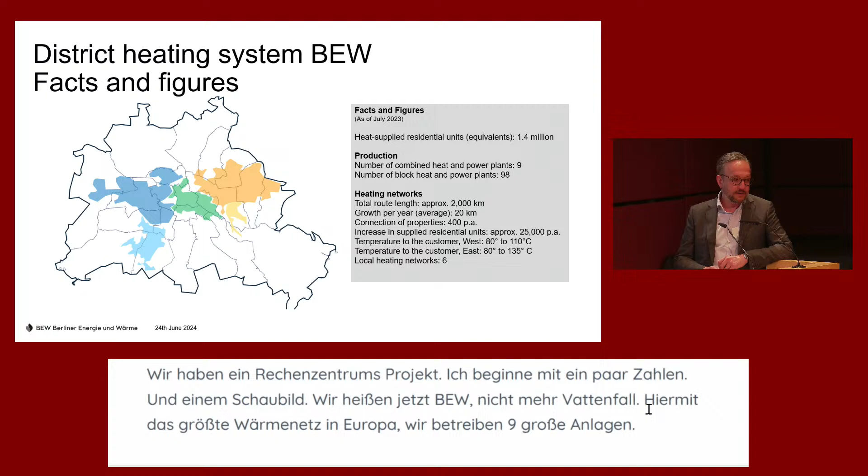Well, let me start setting the scene. That's who we are. By the way, BEW now, not Vattenfall anymore. What you see here is Berlin and our area of grids, and it's the biggest heating grid in Western Europe, around 2,000 kilometers. We are operating nine big plants and almost 100 smaller CHPs, around 20 megawatts each. And if you calculate all the heat we are delivering in standard flats, it would be 1.4 million

residential units. So it's big, and that's part of the problem, I would say, because there's still an eastern and a western part. And we are operating our grids at 80 to 110, and in the eastern part even up to 135 degrees.

And of course we are thinking about 4th generation of heating networks, but the fact is that we just had,

I think my mobile is disturbing something here.

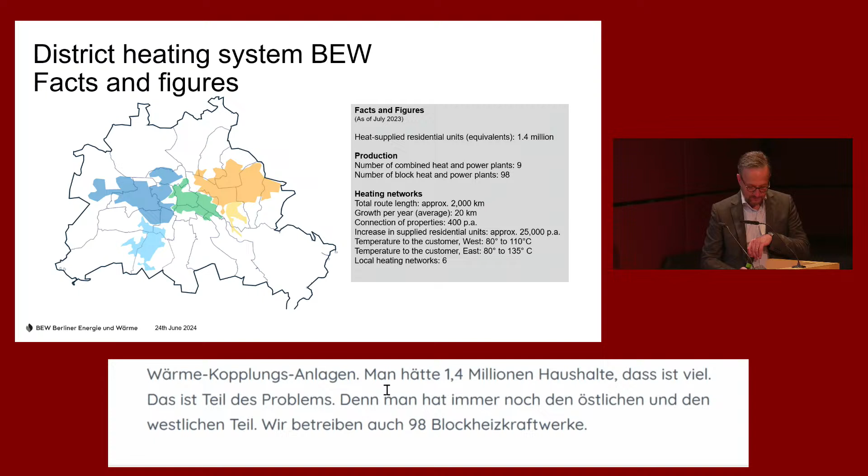The fact is that we just had our birthday, 140 years BEW, right? And all the buildings which are connected are not ready to get flow of 60 degrees Celsius. They certainly need more, so it's hard to change. But however, that's our path. I will jump through. We need to reach that goal of high amount of renewables, and our aim is to reach it even in 2040, to have it completely green.

And the next slide shows you the plan, how we want to do it. It's from our Dekarbonisierungsfahrplan. That's the reduced transformation plan, which you need to bring in if you want to participate of BEW, right? And we already did that. And what you see towards 2040 and 2045, there is a huge amount, it's a fifth, 20%, where we plan to get heat from environmental sources. Can be the River Spree, we have a project there, can be from water treatment, we have a project there,

but of course it will be also excess heat, waste heat from different industries, which is hard in Berlin. As you know, there are no bigger industries anymore. It's different than 100 years ago. But so we are looking at the newer industries, and this is why we started almost 2 years ago 2 projects and trying to bring data centers on our sites.

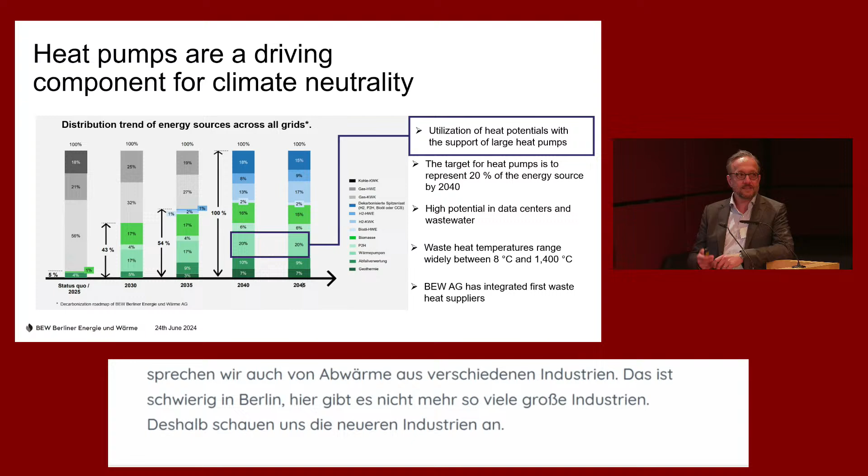So it's 2 sites. It's in the eastern part of our grid area, 2 big plant sites. It's Klingenberg and Marzahn, and they are all refurbished, and there should be space at least in one site for a data center, and that's where we're digging in like 2 years ago. We started that. And I bring you a little detail from that project today that might explain what makes it so different when you bring together 2 industries. And that is a great fit to your workshop like 2 weeks ago from the BMWK.

But let's start with this slide. What is heat offtake all about? I mean, you know it, but if we meet a partner or somebody is coming towards us and approaching us, we usually use this slide and the next slide, which is the slide we always called quality of heat, just to make it understand what we need as a district heating operator and what the partner is able to provide. And usually it's about the one, right? It's at the access point.

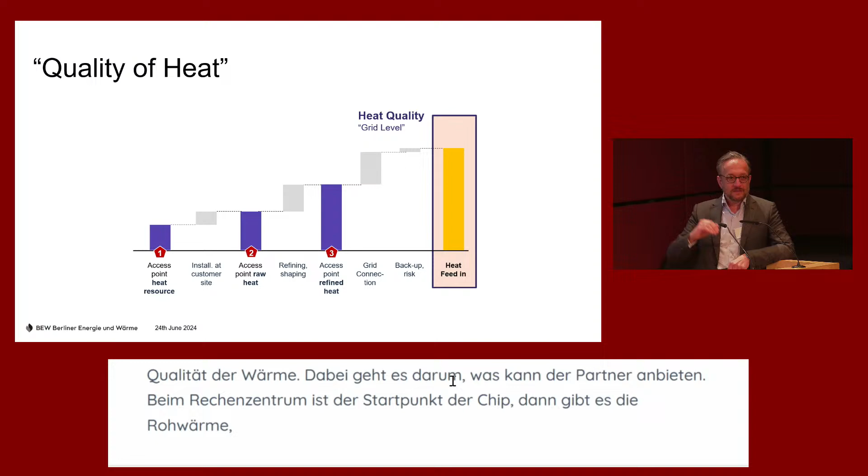With regard to the data center, it would be the chip, and then you get the 2. It's the raw heat that would be somewhere in the end of the cooling system of the data center, right? And then you of course have to refine it to bring it to the right temperature level, and then you need the grid connection. And you need the backup risk, which is in German the Besicherung, not the Versicherung, but the Besicherung. And then you actually have, when it's nice and yellow, the quality we want. It's a temperature level, it's Besicherung and everything else.

But of course, as I explained, Berlin, big city, we need to pick up every puzzle piece of this big jigsaw puzzle, right? So we go after every project, and then the discussions usually start, okay, where is the border of ownership? Who operates the heat pump? And usually it's not the core business of a data center to operate a heat pump. So we are asked to do, and of course we can do that, and we want to do that, especially on those 2 projects on our sites. So we go somewhere to 3, sometimes to 2, but at the moment, most of the projects we discuss 3.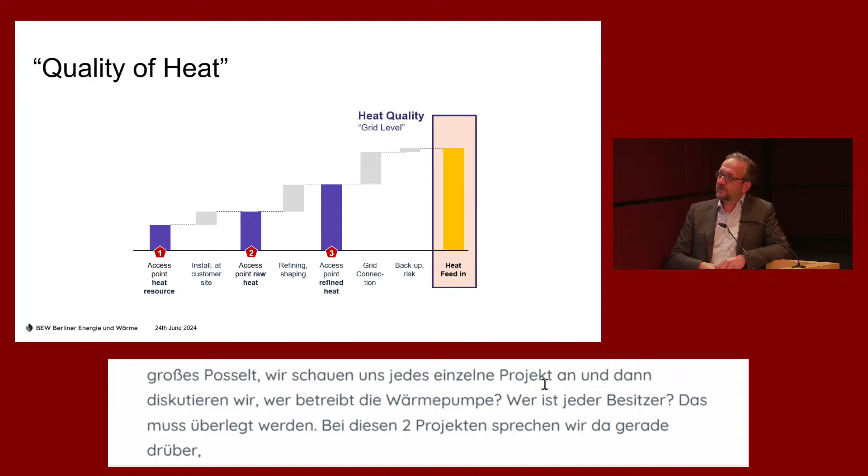It's important to understand that every project is very, very specific, and so that's why we always present this slide in the very first discussions, just to make it clear that it's not too easy. Okay, what's the price of the heat? I can give you excess heat. Usually after that slide, the discussion is a little different.

And the other thing maybe at this point, which is important: even if they can deliver a higher amount or higher degree, it's important what they want to have back, right? Because the business case is always you deliver heat, you get cooling back, and the delta Kelvin has to be small. So if they deliver 50, they should not want 20 back, otherwise the heat pump won't be efficient.

And that's the detail I brought, because 2 years ago, we really needed to know who is the best partner we want. And we had a big process, almost like a tender, invitation to partner, we called it. And I personally learned that the value chain of data centers always starts with the property, then it's a property developer, then it's a project developer, then it's the operator, and then in the end it's the end customer for the data center world.

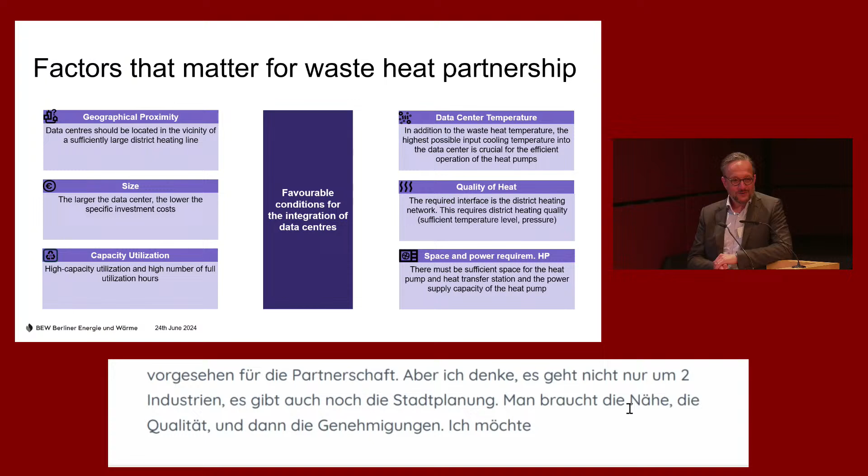And I already saw your little sign. Maybe we have some questions. Thank you. Indeed. Thank you, Daniel. Questions for Daniel. I have my magic mic ready here. Let me see if there's another one here who hasn't asked a question yet. But first inspiration from you.

That's a question again from me, Rolipka, BMK. One question was, what is the proximity that is still suitable for a data center to deliver waste heat to your district heating network?

You mean what's the best distance? That's best, but how far away is still usable for you? It depends. It's like a lawyer. I'm not a lawyer, but no, seriously, it depends. We had a big project. It was so big, we were even simulating it in our system. It would be 9 kilometers, but it was too risky in the end, right? But it was so big that it looked so nice and maybe valuable in the end. So I said, okay, let's go to a certain point.

Those two projects, if they happen, they are directly at the power plant. So this is the perfect world. So it's very dependent on the size, very dependent, and the hours of operation, because it is always the challenge that those guys can only deliver. I don't know the English term for Können und Vermögen, but it's not like a power plant, where you can calculate hour-wise in the end. It's not a Fahrplan, and so it really depends on the size.

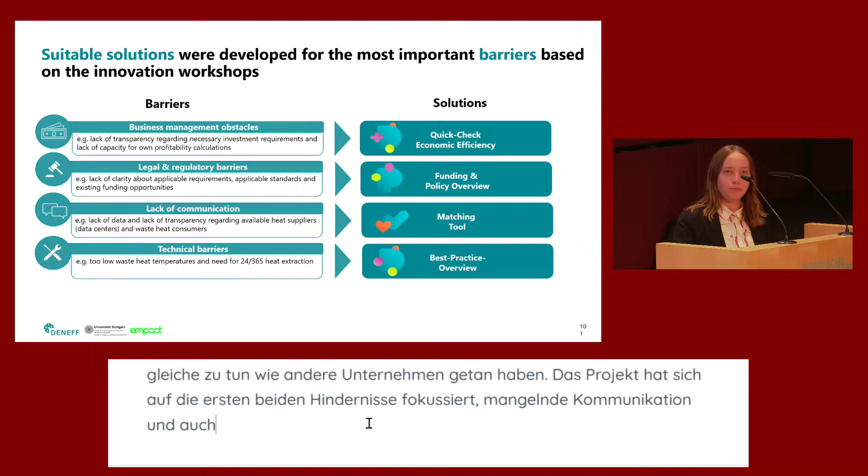The two left, I will go further in depth, because the project focused on these two barriers, so the lack of communication and also the business management obstacles. For the first one, they created a solution which is a quick check tool where they focus on the economic barriers of how to develop a business model utilizing the waste heat from the data center. So if you are, for example, a data center who wants to provide the waste heat, you can download an Excel sheet and put all your data in.

And there's a short overview if you don't have the background knowledge as I do. But if you have deeper knowledge, you can also get clearer views about how the business model can be in your case. So this is one simple solution which is available online.

And the second solution is a matching tool where simply everyone who wants to use waste heat or has waste heat or might be in any way connected to waste heat, such as district heating providers or something else, can log in and hopefully they get a match at this matching tool. Right now, there are some waste heat providers, so data centers, or also waste heat consumers who want to meet up, but they don't have the whole opportunity right now.

So we are now at that point that, as Henning said, the project Bytes to Heat will end. We have the matching tool, but could that be enough just to have the matching tool? Maybe we do need more. And therefore, we started in April the project AwaNetz, because we want to focus more on the lack of communication, not just only getting the potential matchings, but also break silos down and bring the people together.

And the project AwaNetz not only focuses on the waste heat of data centers, but we want to broaden our focus on all waste heat in Germany. And we also heard that the heat planning for municipalities is starting right now. So this is also another view of stakeholders looking into how waste heat can be utilized in Germany. So the setup is there, and we have the potential, and now we want the project AwaNetz to be the caretaker of all the waste heat suppliers and people who are interested. How do we want to do this?

We want to do this by building up a knowledge portal where we collect all the knowledge that exists, so from Bytes to Heat, but also from you guys, and we want to close the knowledge gaps between that, so that everyone who wants to utilize waste heat or is interested in consuming waste heat can look up in the knowledge portal what the next steps are.

As a second step, we want to build networks, as I said, but also create events where every person can meet. So first of all, we are starting with the Federal Waste Heat Conference in October, where we think Germany, or the waste heat people of Germany, can meet and exchange their ideas or knowledge or experience about waste heat. But we also add online and regional exchange and network events where everyone can meet up.

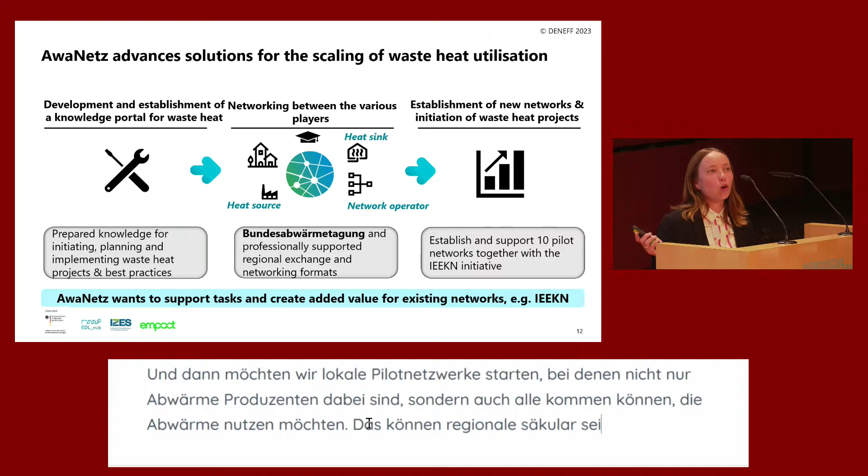So now I hope that every one of you is very excited to start with me to utilize the waste heat. And maybe you will ask yourself, okay, how can I get into this project AwaNetz? So the first step would be to join us at the Federal Waste Heat Conference on the 10th of October, where we have the big kickoff of our project.

The second thing is, when you, maybe in your region or municipality, want to use the waste heat available or get to the consumers, then you could also get in touch with us, and we will create a local network together.

And the third thing would be that we not only want to create new pilot networks, but also projects utilizing waste heat, and therefore we want to maybe create standard cases or standard contracts with you, so that waste heat utilization can be as easy as it should be. So hopefully we can do that together.

Just to give a quick overview, what can you expect at the federal conference? We want to look at data centers in Berlin and at the regional level, and also, again, the political framework. As I said, it's very important to get all the people to know exactly what the next steps are.

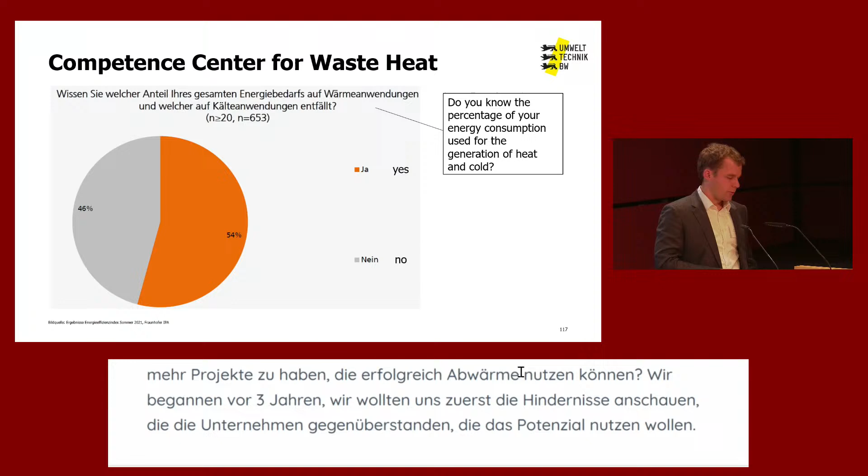So, the barriers can roughly be outlined by 2 results of the so-called Energy Efficiency Index of the EEP of the University of Stuttgart, which is an annual evaluation of companies in connection with their energy usage. The first question was, you can read it here, do you know the percentage of your energy consumption used for the generation of heat and cold? It was the year 2021, and you can see the result over here, which was kind of disillusioning when we saw this first. What the result tells us is that almost half of all companies are lacking fundamental data for anything related to waste heat or energy efficiency measures in general.

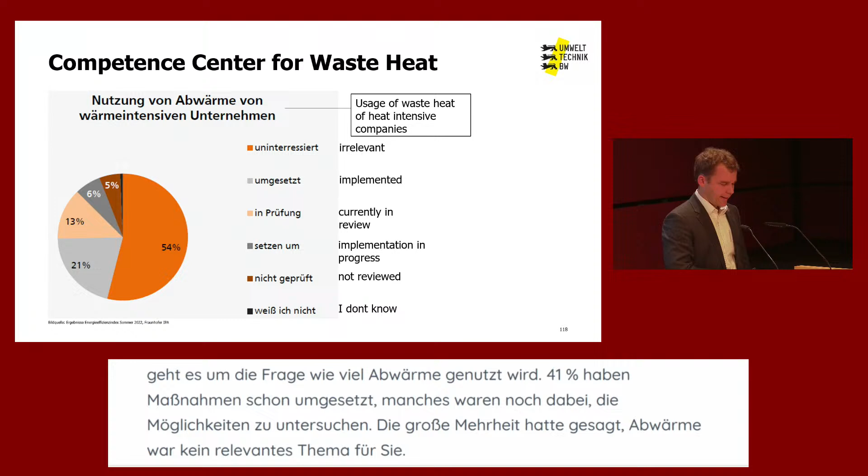The second result is from the year 2022. Here you see the distribution of the replies to the question, to what extent does your company implement waste heat? What you can see is that like 21% had already implemented measures. Some companies were currently reviewing their possibilities, etc. But the overwhelming majority said that waste heat is not a relevant topic for them. And when you compare those results from 2021 and 2022, I think it's a pretty strange coincidence that about half of all companies said that waste heat projects are irrelevant for them, and also about half of all companies answered that they can't allocate their end energy consumption. So they might be connected.

And of course, companies need to know that there is a competence center as a base for getting in touch with us and making use of our support, which you can see here, and I'll give you a very short overview in the following slides. And yeah, sorry for the PowerPoint.

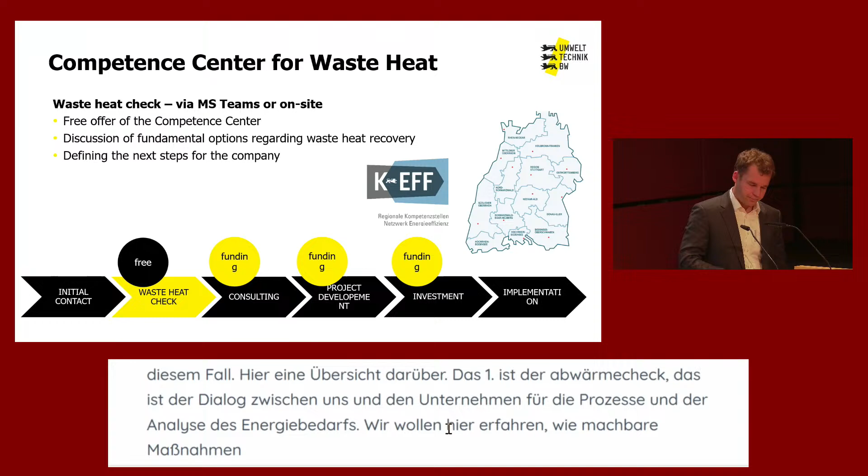Sometimes a waste heat check is executed in combination with other projects like the KEFF Plus program, which aims at resource efficiency approaches in SMEs, or the EEKNN mentioned in the last presentation. The person managing KEFF Plus is also located at UTBW, so this state agency fulfills kind of a role like a one-stop agency when it comes to sustainability topics for companies located in Baden-Württemberg.

As a follow-up of such a waste heat check, it is crucial that the company knows exactly how the next steps look like. For the next step, usually some kind of waste heat concept based on measurements as an important part of gathering base energy consumption data, most companies urgently need a specialized engineering service provider. Finding such an appropriate partner is a huge barrier for almost all SMEs. As a consequence, we name different engineering consultancies that have matching references after every waste heat check.

And furthermore, we combine such a list of possibly fitting service providers with information about the special funding program of the federal state. The program has the conditions shown on this slide here, and it consists of 2 stages. Those conditions are pretty attractive, especially for SMEs, because their upfront costs become significantly lower. What you see here are the conditions of the first stage, like 600 euro per day and a maximum of 30 consultancy days at the first stage.

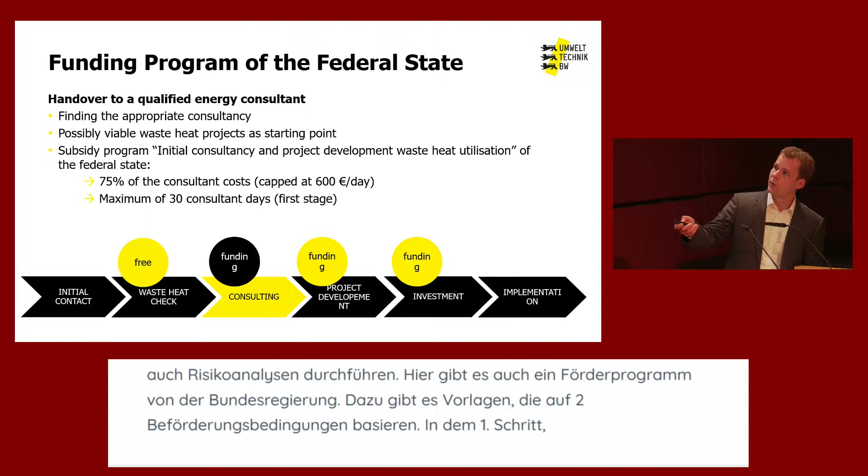The second stage is the so-called project development phase, which has the same conditions as the first stage, with the exception of up to 100 consultant days instead of 30, and the capped funding at 60,000 euro instead of 18,000 euro. This makes the program pretty attractive even for larger projects as well. The goal is to support possible waste heat projects till the point where a company has to decide to invest or not.

If companies struggle with the application form, they can reach out to us and we help them easily by phone or via MS Teams. So they save lots of time playing ping pong with the bank. When a company decides to invest in a technical waste heat measure, there are several funding programs of the Federal Republic located at the BAFA and KfW Bank. You've seen these on the slides from Ms. Stella. And the federal state doesn't have real additional funding programs to these.

Following the successful implementation, the company can apply for different best practice programs located at our agency, so that we have an increasing number of vivid examples which we can use for initial contacts to motivate further companies. In the context of the implementation of a technical measure, it is crucial to make use of the best technology fitting this specific project. As a flanking offering, there's the so-called GreenTech BW Atlas of Umwelttechnik BW, where companies as well as energy consultants can search for appropriate technologies located in the federal state of Baden-Württemberg. So, the knowledge and the money stays in the land.

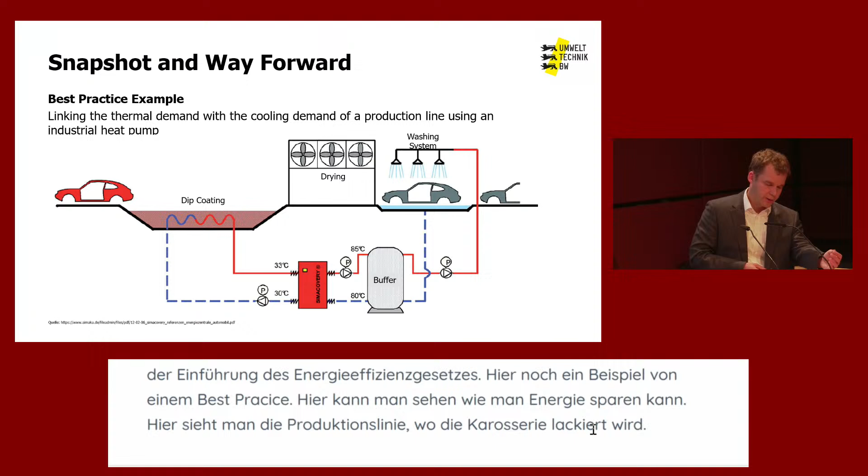So, the best practice example. On my last slide, I want to show an example that includes high efficiency potentials and therefore energy savings. What you see here is the part of a production line where chassis of cars get their coating. As a first step, a chassis is washed using hot water, then dried using hot air, followed by a dip coating procedure. All these process steps are pretty energy intensive.

The constant demand for hot water and hot air during the first two steps is followed by the constant need for cooling at the dip coating, which gets heated up by the hot chassis permanently. In the past, the cold side has been driven by free cooling and a compression refrigeration system, the hot side by a gas boiler, so pretty conventional. Linking those two sides of this production line using an industrial heat pump resulted in significant energy savings and a payback time of less than 2 years.

Sounds good, but well, most SMEs, and Baden-Württemberg is full of SMEs, don't run a production at such a large scale, but have similar circumstances. The simultaneous need for cold and hot liquids. The dip coating can be seen as representative for cooling zones, cooling circuits, or even larger server rooms, whereas the hot side could be a district heating system, for example.

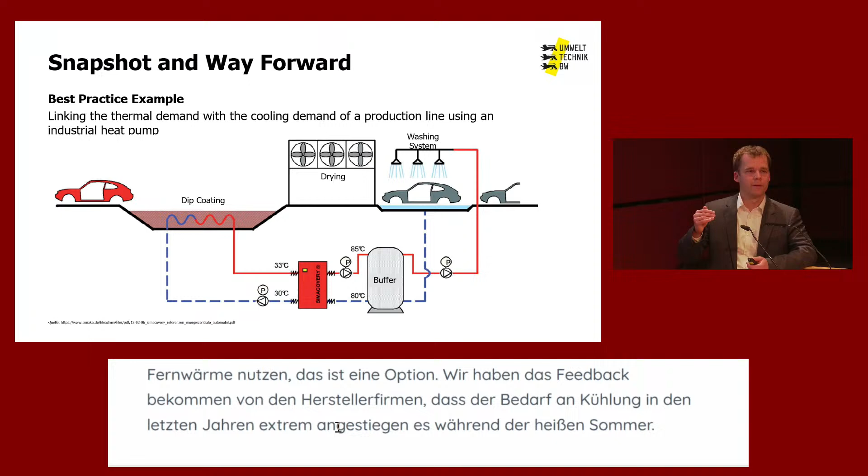So, what we experienced, or the feedback we got from a lot of manufacturing companies, was that their cooling demand during the last 2 or 3 years increased brutally during the summer times, and right now they are looking for technical solutions to meet this demand, to be able to run their production in the next summers, because they sometimes had temperatures over 40 degrees, and then the production can't run anymore.

Okay, I hope these few slides could provide a rough overview of the Competence Center for Waste Heat in Baden-Württemberg and how we have been operating for 3 years now. In the end, the goal of all of our activities is to raise the number of successfully implemented, economically feasible waste heat projects within the federal state.